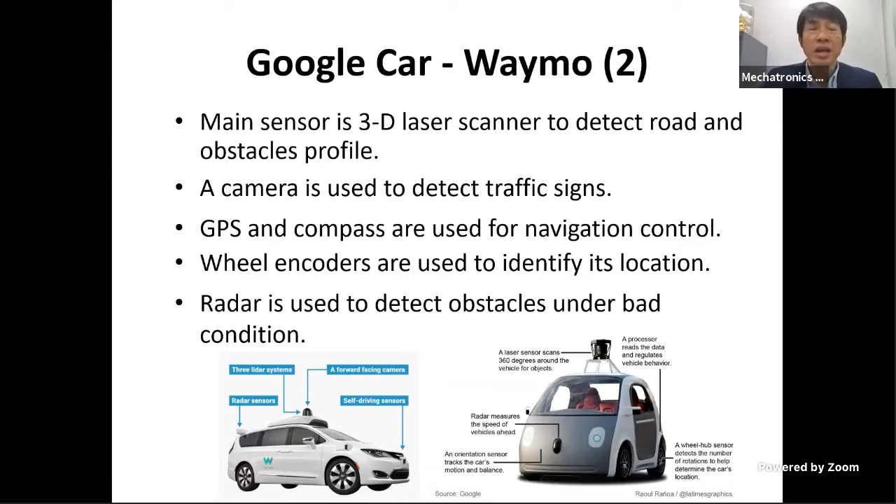The photo at the bottom shows several versions of the Google car and Waymo. Here is a video showing the Google car, the latest version, called Waymo. You can see it is uniquely designed. On top, you can see something rotating—that's the mirror from the laser lens scanner. It can detect distances of around 80 meters in real time, in 3D. The black part on the front panel consists of a camera and also radar. The self-driving car uses all this information to decide its path.

The second system is Autopilot from Tesla. Even though Tesla's Autopilot is not the highest technology, in terms of commercialization it is the most successful. The reason is that Tesla uses very cheap sensors. Tesla installed a lot of sensors, but all of them are very cheap: 12 sonar sensors, 8 cameras, and only 1 radar. To navigate, they use AI rule-based methods for navigation and obstacle avoidance.

There are some predefined rules, for example following the preceding vehicle, lane centering, rules used for the automatic parking system, or rules for when the vehicle has to handle a very sharp curvature. During those conditions, it will follow the predefined rule.

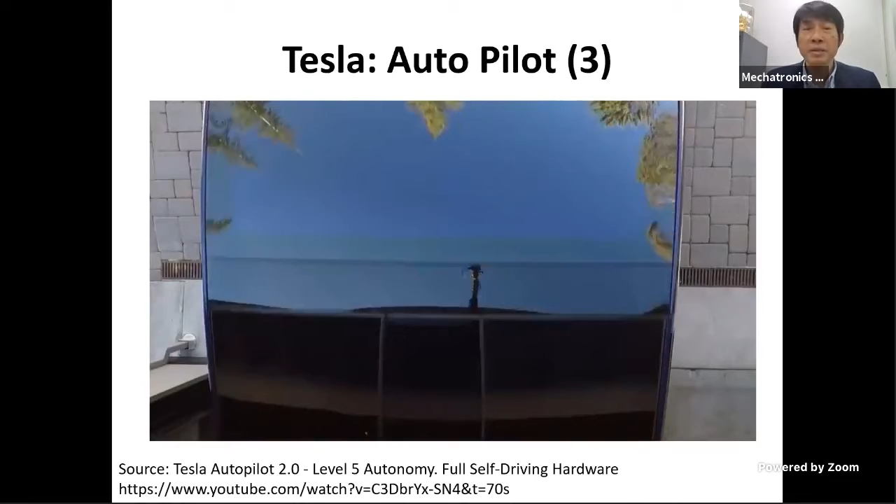Based on all this information, Tesla can do self-navigation. The autopilot system is installed in Model X and Model S, and it is an option for Model 3. This video shows how the autopilot from Tesla works. Actually, Tesla is a luxury electrical vehicle, so it looks just like a simple electrical vehicle.

The driver can select the destination, and then the autopilot from Tesla will perform 2 actions, as I already explained: global path planning and local path planning. And then it uses a lot of sensors.

In order to detect obstacles, it mainly applies cameras to detect the distance and direction of the obstacle. But Tesla still claims that it is the responsibility of the driver to be conscious, because this is just assistive technology. For any accident, Tesla informs that it is the driver's responsibility.

The third system that I will explain is called Open Pilot from Comma AI. Today we can see that the self-driving car is available as a module, just a module of the self-driving car or autopilot, and it is very cheap.

This is the Open Pilot from Comma AI, and it is open source. Drivers who know programming can modify the parameters and make the control fit their preference. The first version of Open Pilot is called the Eon Development Kit.

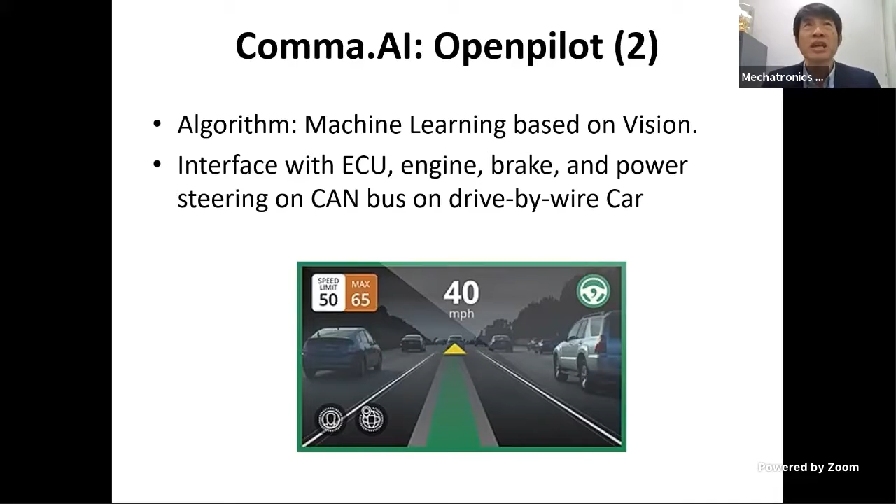Now let's come back to Thailand. Thailand started the project around the same time as the DARPA Grand Challenge, around 2004, 2005. At that time, I was the president of the Thai Robotics Society. We knew that every university in Thailand had different expertise.

AIT is very good in dynamic control. Chulalongkorn University is very good in mechanism design. King Mongkut North Bangkok is very good in manufacturing or machining. So there were 12 universities which joined hands, and we tried to create a national self-driving car project.

At that time, we proposed a 26 million baht project to the government to get support. But that was the year 2004, 2005, and all the researchers from the 12 universities were very young and didn't have much expertise. So finally, the government provided funding of just 1 million baht, only to do a feasibility study.

After we distributed it, each university received less than 100,000 baht, so we couldn't do much. Finally, we decided to approach private companies in order to support our project, and I will explain later.

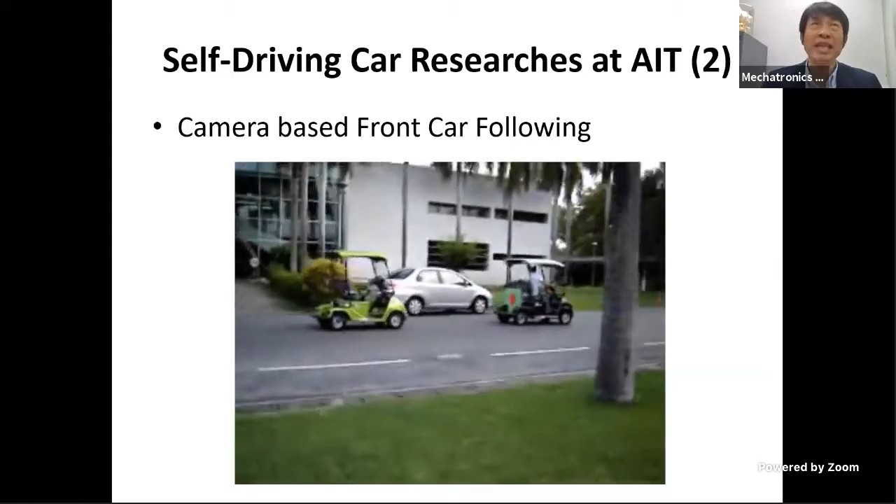We can also determine the position of the preceding vehicle by looking at the center of the lead circle in the image. Based on that position, we can control our steering wheel in order to follow the preceding vehicle. But this adaptive cruise control can get the speed of around 2 or 3 kilometers per hour.

There is one function which is very important for any self-driving car, that is the automatic parking system. If we are able to get the bird's eye view information from the parking lot, planning the path for automatic parking is very easy. But nowadays there are very few parking lots which provide bird's eye view information to the driver or to the car.

So what we can do is just install a local sensor. It can be sonar, radar, camera, or laser scanner. Based on the local information, we get only partial information of the parking lot. We have to accumulate the information, and after accumulation using sensor fusion, we have to decide how to do a proper automatic parking.

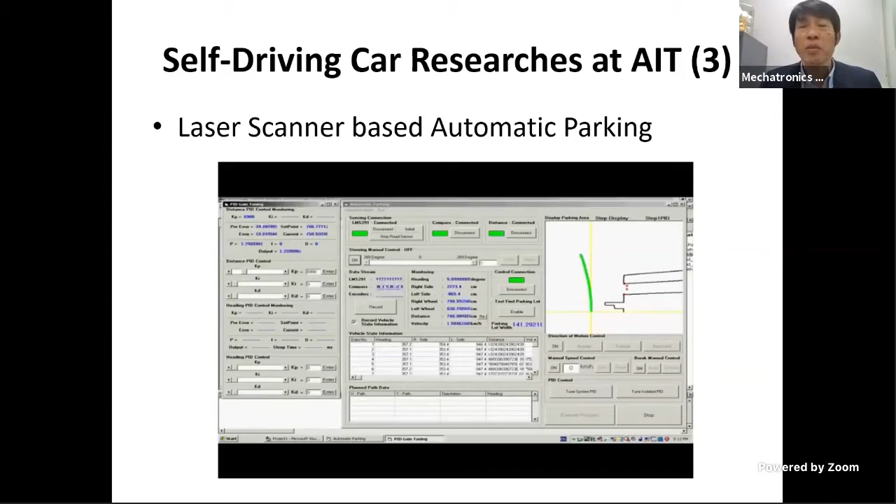This figure shows the GUI of the system. In AIT, we use a laser scanner to scan the parking lot. We get the profile of the parking lot, and based on the position of the vehicle, we can plan a path in order to do a proper automatic parking system.

In the adaptive cruise control system, if the preceding vehicle runs faster than our set speed, for example if we set our speed at 100 km per hour and the preceding vehicle runs faster, we can still keep our speed control at 100 km per hour. But if the preceding vehicle runs slower than our set speed, we cannot use speed control, otherwise we will crash into the preceding vehicle.

So what we need to do is use distance control. For the distance control, there are several algorithms. Some may prefer to keep a fixed distance, like 10 meters or 20 meters. That is one technique.

Another technique is by maintaining a time headway. For example, if we set a time headway of 1 second, it means that if the preceding vehicle runs at 36 km per hour, the safety distance should be 10 meters. But if the preceding vehicle runs at 72 km per hour, the safety distance should be 20 meters. If the preceding vehicle runs slower and slower, we may set a minimum safety distance, depending on the developer, whether 3 meters or 5 meters, so that we have enough distance with the preceding vehicle.

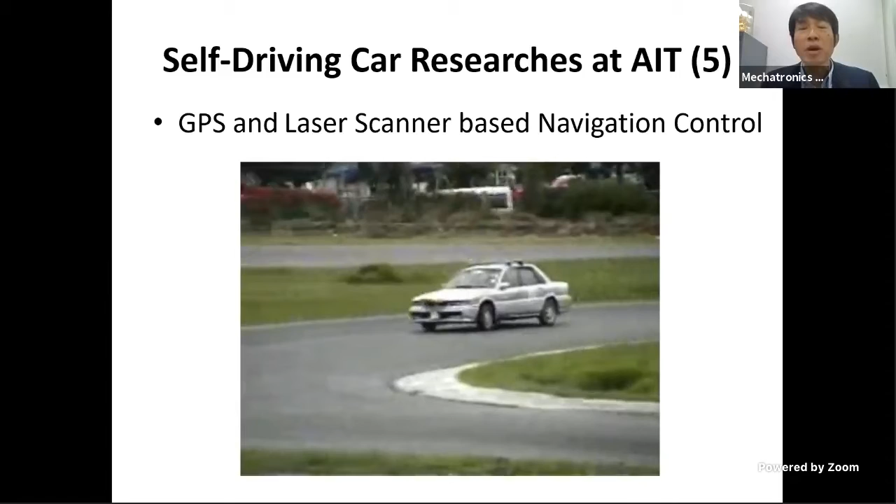If it obeys properly, then the bonus point will be given. And this is the video of the third year in 2009.

In 2009, we changed the theme to speed racing. This is the video from the final round between the team from AIT, with a Mitsubishi, and another team, the yellow car from Royal Thai Air Force Academy.

In the third year, the rule of the game is that we place one vehicle at the 0 kilometer point, and another vehicle at the middle of the 1 lap distance, because 1 lap at Bangkok Racing Circuit is 2.2 kilometers, so the other team is placed at 1.1 kilometers.

Then we provide 20 minutes, and the competitor has to run as fast as possible, but we limit to a maximum speed of 45 kilometers per hour, because otherwise it will be too dangerous and we will not be able to control it. So the maximum speed is 45 kilometers per hour.

Each team has to run as fast as possible in order to catch another team. If you are caught at a distance less than 10 meters, then you will be the loser. Then we find the next pair until the final round.

So this is the video from the final round. Here, the team from AIT gets the first prize. And actually, our speaker, Khun Methi, is also a team member here.

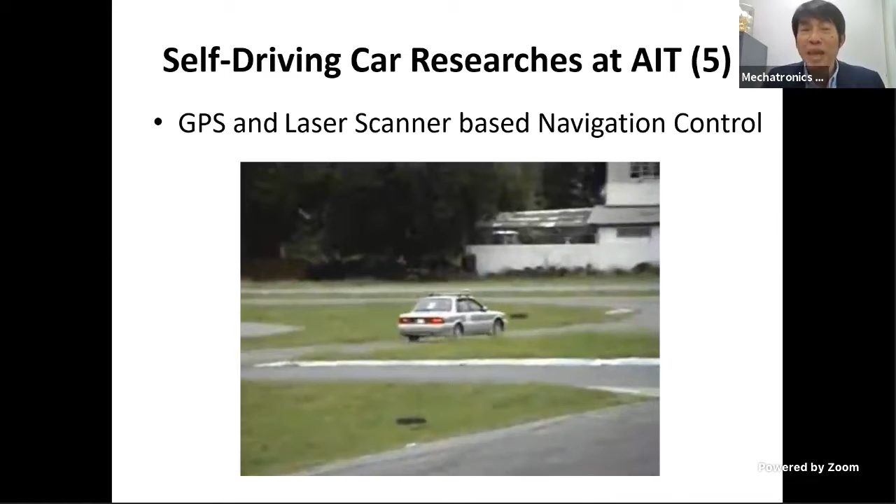So we install GPS, we install a compass, and based on the waypoint, it will try to follow the waypoint. We install a laser scanner in order to detect obstacles. You can see in the racing field there are several obstacles, and if the vehicle can avoid clashing with an obstacle, we provide a 100-meter bonus point.

Based on this competition, we could catch all the remaining teams in the competition, except in the final round we could not catch the team from Royal Thai Air Force, because they were also very fast. But after the 20 minutes, we calculate from the accumulated distance plus the bonus point, and finally the team from AIT gets the maximum distance and wins the first prize.

After we organized it for 3 years, AIT organized it on behalf of the Thai Robotics Society. We found that we could make the competition more challenging using the same rule.

It is a self-driving vehicle rule, but now we change the platform from 4-wheel, which is stable, to just 2-wheel, like a bicycle wheel. So it's not only trajectory tracking or obstacle avoidance, but now it involves balancing an unstable system, because the bicycle has only 2 supporting wheels, so it will fall since there is no driver. Now each team has to think about the control algorithm and mechanism in order to balance the bicycle.

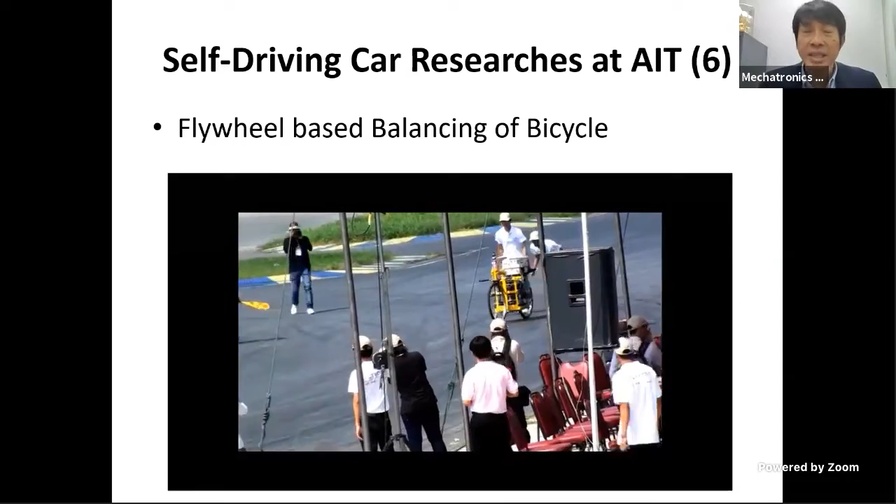In this video, we can see the champion team from AIT. We organized it, but we also participated in the competition. We use 2 flywheels. The 2 flywheels run at the same speed, but in opposite directions.

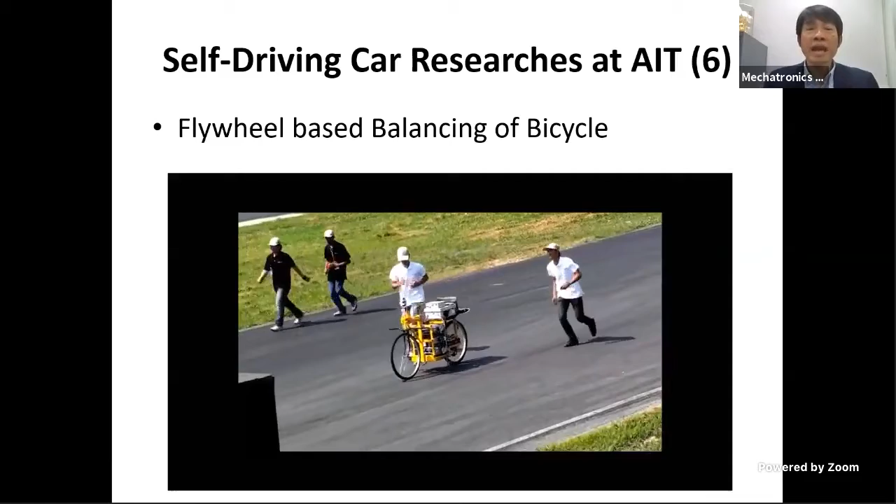Then we change the axis of the angular momentum of the flywheel. We design it so that they run at the same speed, meaning the summation of angular momentum on the vertical axis is always 0. So there will be no bias torque to move the bicycle to the left or right. But we have the summation of angular momentum, the rate of change of angular momentum along the front and back position, which will create torque to balance the bicycle.

If the summation of angular momentum is to the front direction, then the bicycle will have a torque which turns it to the left. But if it is to the back direction, then there will be torque to make the bicycle turn to the right.

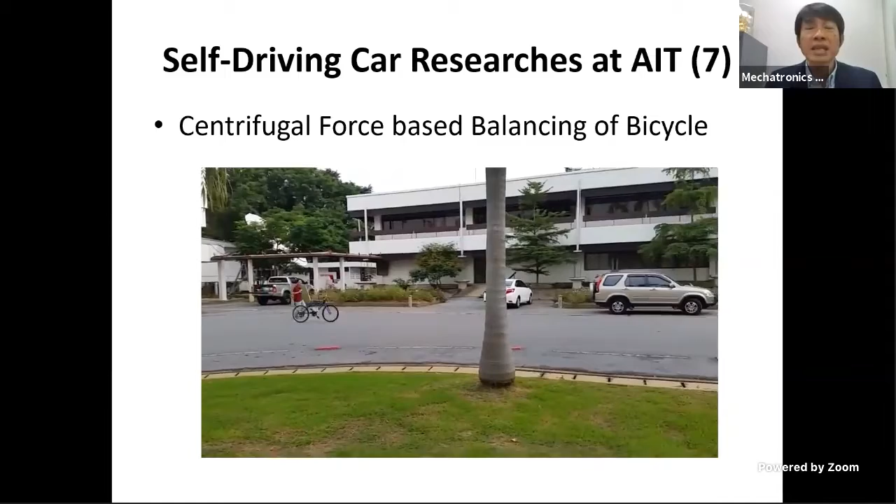This is another technique which applies the concept of centrifugal force in order to balance the bicycle. If the bicycle is falling to the left, then we can increase the centrifugal force by reducing the curvature radius and increasing the speed. Then the centrifugal force, which will be the same as the centripetal force from the friction of the tire, will create a moment that flips the bicycle to the right direction. So by controlling a proper speed and curvature radius, we'll be able to balance the bicycle.

This technique is very good, very interesting, but anyway, this team could not get the first prize. It is just the excellent technique award.

How about the indoor environment? If we have to work indoors and want to make a self-driving vehicle like a forklift, the problem comes from the sensor because we don't have GPS to provide X and Y coordinates. We have to think about other techniques to localize the system - we need to know the X and Y coordinate of the forklift and its heading. There are several techniques for localization: dead reckoning using encoders, using a camera with visual SLAM to identify X, Y and heading, or using a laser scanner with laser SLAM.

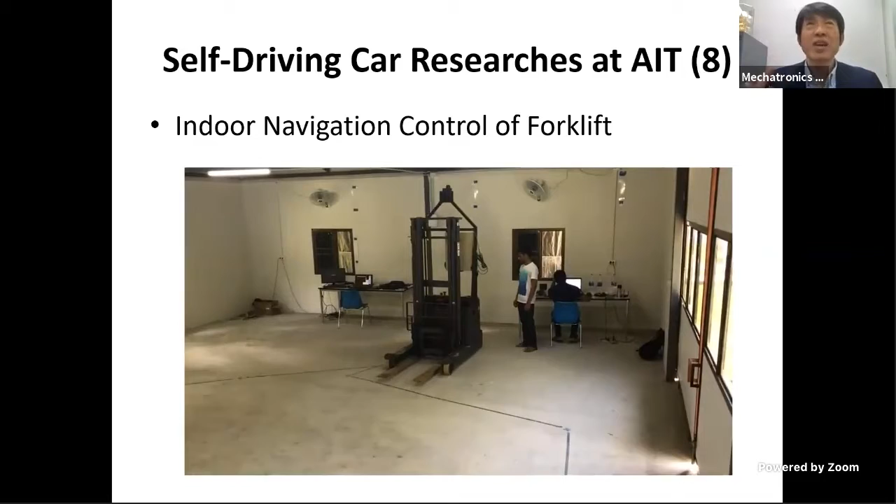This is the technique we use. We joined hands with Planet TNS and created this as a product, selling it for only 1.5 million baht. In the first phase, and in the second phase we make it as a module so it can be installed on any second-hand forklift to make it self-driving. For localization we use a combination of laser scanner and reflector - if we know the coordinate of the reflector in advance, we can identify our X, Y coordinate and heading. This is another experiment on obstacle avoidance.

For obstacle avoidance there are several algorithms. You can use the well-known rule-based approach, the behavior-based technique, or the potential field technique to avoid clashing with obstacles. We can also combine several techniques, like rule-based and potential field, to avoid obstacles. This is the experiment, but mostly nowadays in factories, self-driving forklifts just stop when they see an obstacle. We can enhance the function so it can avoid clashing with the obstacle, shortening the working time.

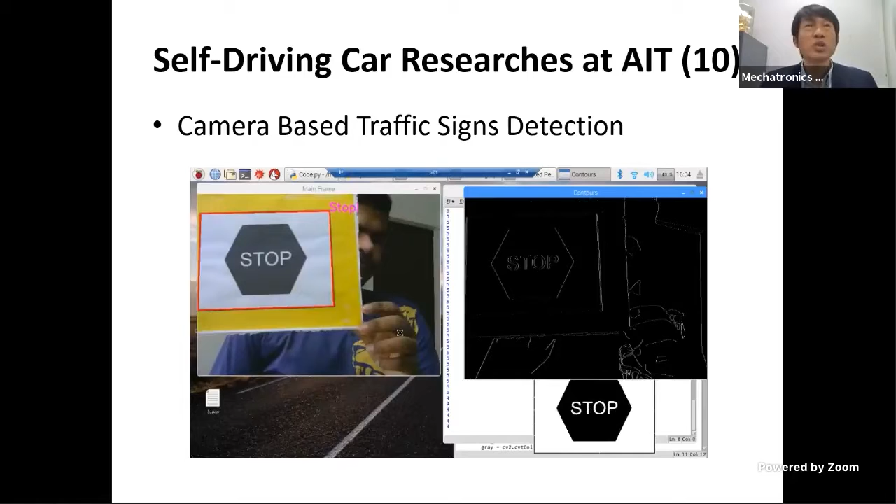This is also a very important technique: traffic sign or traffic light detection. When running a self-driving car, it has to obey traffic signs or traffic lights. We use a camera, and based on the image we process it - removing noise using Gaussian blur or other filtering techniques, then edge detection. Based on edge detection we identify either a circle or rectangle. Then we use perspective transformation so the traffic sign is at a proper angle - roll of 0 degrees, pitch of 0 degrees, and yaw of 0 degrees. Then we normalize it to get proper dimensions of the traffic sign or light, and do template matching using correlation, multi-layer perceptron, Hamming network, or competitive network to identify the traffic sign or light.

So these are some developments in Thailand. Now let me explain about the AIT self-driving car. We developed it on a platform of a Mitsubishi Galant 2000cc, model 1993, with automatic transmission. The cost of our platform is very cheap compared with the cost of the sensors - a laser scanner is 200,000 baht, GPS is 200,000 baht, but our second-hand Mitsubishi is just 50,000 baht. So it's super cheap compared to the other devices.

We modify the system and install the navigation module - we have GPS, compass, along with a digital map. For the LiDAR module, we use a laser scanner to detect distance to obstacles, used for obstacle avoidance. We install machine vision to recognize traffic signs or traffic lights. All the information is processed by the processor, and the output is speed control and steering control. The speed of the vehicle involves two things - since we use a gasoline engine, it involves the throttle valve, and if we need a high deceleration rate, we involve the brake system for speed control. For steering or heading control, we control the steering wheel angle.

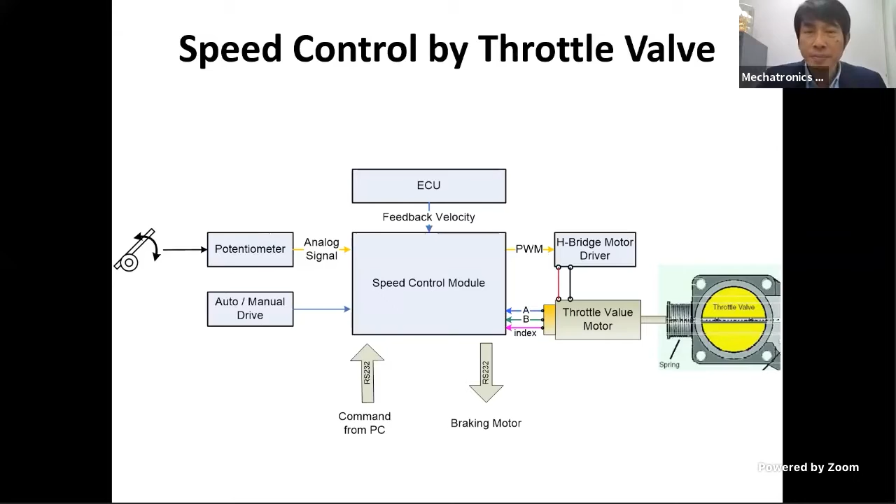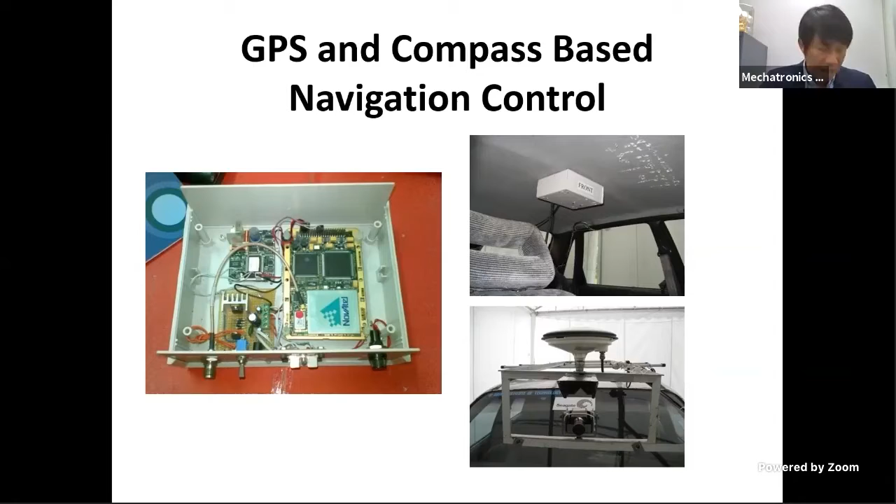Now, how do we do waypoint tracking? For any vehicle - car, bicycle, drone, or boat - if we want self-driving function, what we need to do is create a virtual straight line connecting between waypoints, and then identify the distance error, denoted by D. This is the distance of our vehicle from the straight line connecting two waypoints. We also determine the angle of the straight line connecting two waypoints, and measure our heading angle from the compass. Based on the difference, we call this parameter the heading error, denoted by A.

So the job of the control engineer is to design the control algorithm in order to make D and A parameters become zero at the same time. We may use state space, LQR, fuzzy, or a combination of two loops of PID. Actually, PD is quite enough.

One PD is used to control the distance - we have KP and KD for the distance. We have one PD for the heading angle - we have KP and KD for the heading angle.

It depends on what's important. If we think the distance error is more important, we provide more gain for the distance, then the vehicle will come very fast to the center, but the heading will oscillate. But if we think the heading error is more important, we provide more gain for the heading error, then the vehicle will run in parallel with the straight line and slowly and smoothly move to the center of the line connecting the waypoints.

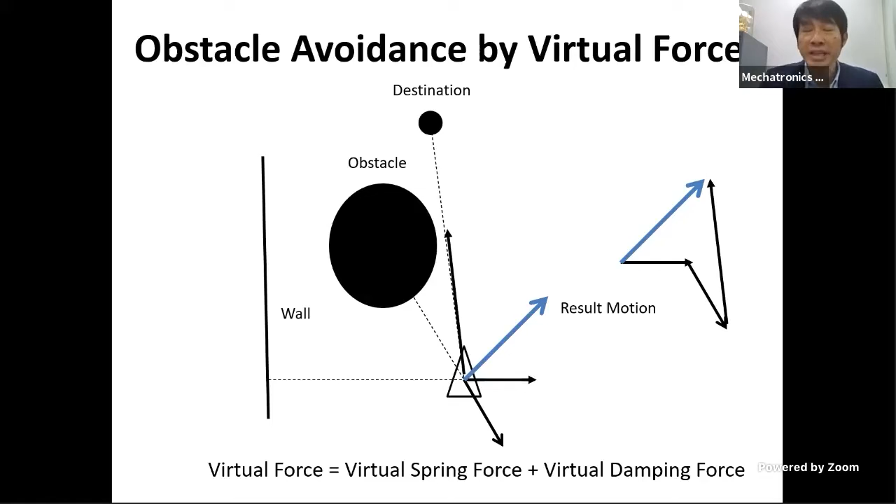For the trend of research and development in self-driving cars, in the past we used proper image processing in order to identify features and recognize the environment, and we had AI rule-based systems in order to design a proper action for each condition or situation.

But nowadays there is also the technique using the concept of completely machine learning. So instead of using image processing, we just use the raw data from the image and then use deep learning in order to identify the situation or condition. For control, we can also apply the concept of reinforcement learning in order to get the direction command and also the speed command directly by using the concept of training or learning.

Now I come to the conclusion of my talk. Self-driving car technology is very useful because it makes driving become safer and more efficient. I'm sure it will be utilized practically, and nowadays it is already used, even though mostly it is only partial, not fully autonomous.

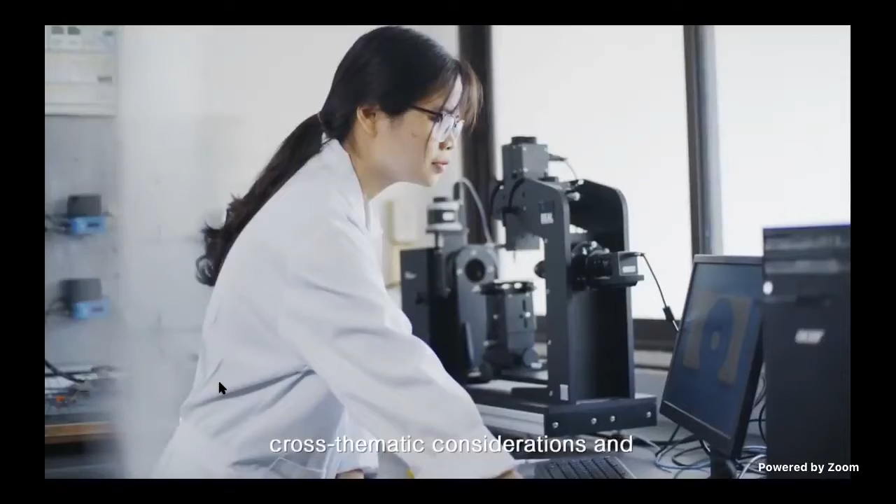A distinctive feature of our teaching and research programs is their close alignment with some of the major global challenges facing humanity. For example, climate change, energy, food, water security, technology, public policy mismatch, and human-machine fusion. Given the innate complexity of these challenges that defy straightforward explanations, our teaching and research programs emphasize multidisciplinarity, cross-thematic considerations, and pragmatic insights into the role of emerging technologies in broader socio-economic contexts.

We are working with many universities and governmental organizations in research collaboration and outreach activities. Some of our research findings have already been translated into new government regulations, new engineering standards and practice, and new engineering applications and tools. I believe our long-term effort has created significant social and economic impact for communities in the region.

We believe that our main role is to produce experts who are truly global citizens who can think globally and act locally. Our School of Environment, Resource and Development takes an interdisciplinary approach to study, analyze and solve global and regional sustainable development challenges, such as social and gender inequalities, rights and sustainability, urbanization and migration, food security, energy and environment, natural resources, and climate change.

The best management schools in the world are based on strong industry involvement, with leaders coming from around the world. It's also a place where a culture of innovation is encouraged. At our School of Management, that is the culture we're trying to encourage, with regular interaction with organizations and business schools where teaching staff and faculty come from around the world. No idea is discarded, and a multidisciplinary approach where collaboration with other schools is supported.

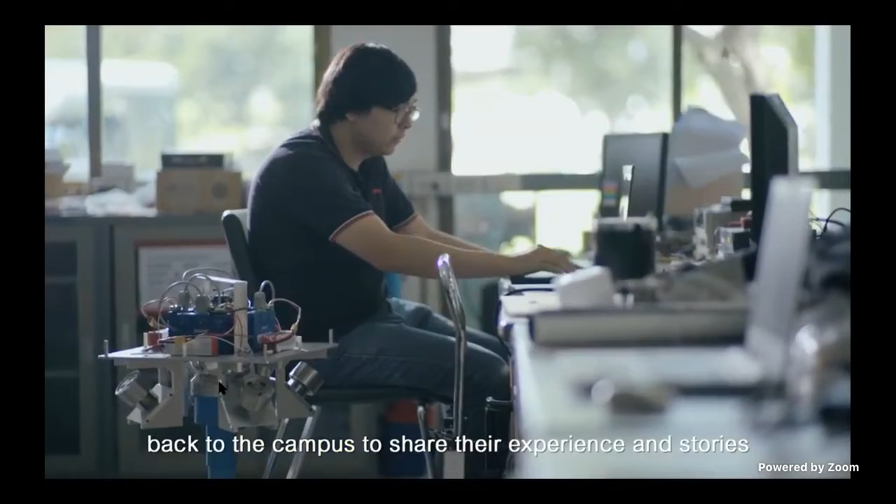The Entrepreneurship Center is supporting AIT students, faculty and alumni to transform their ideas into tangible outcomes such as prototypes, business plans and startup companies. We aim to bring our experienced AIT alumni and successful entrepreneurs back to campus to share their experience and stories and to work with our students and faculty to build their dreams here at AIT.

It's not only the knowledge and subject in the classroom, but the way of thinking. Because when we come to work, it's not exactly as it happened in the books. So having the AIT experience, we look at this like a way of life, and I can find many solutions to overcome obstacles and problems. Another important thing is initiative. This is very important for success in working life.

In my personal career, with the knowledge that I have gained from the Asian Institute of Technology, it has been very helpful in dealing with people, in managing my work life, in managing my family life, and also in furthering my knowledge through the research capacities that I have gained from the Asian Institute of Technology.

Graduates will be well prepared and have vast opportunities to pursue their passion for social impact by continuing in academia worldwide, or joining local or multinational companies, or working for socially focused NGOs, or becoming government officials, or starting their own businesses.

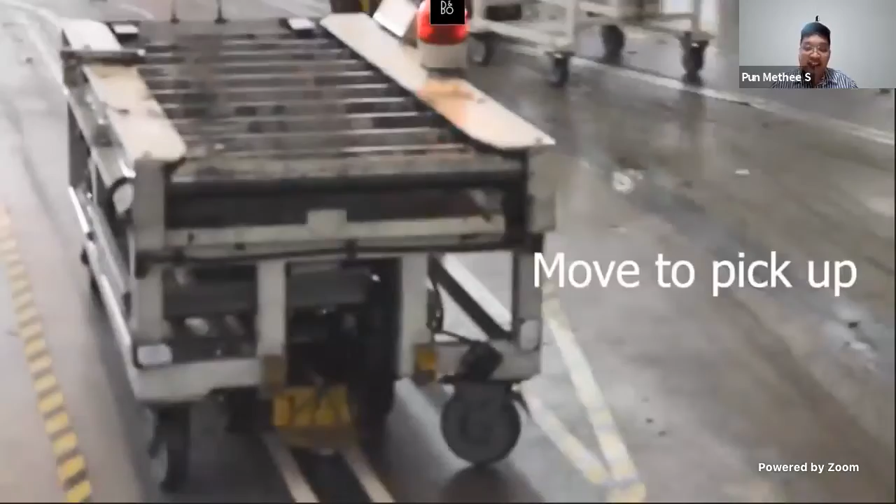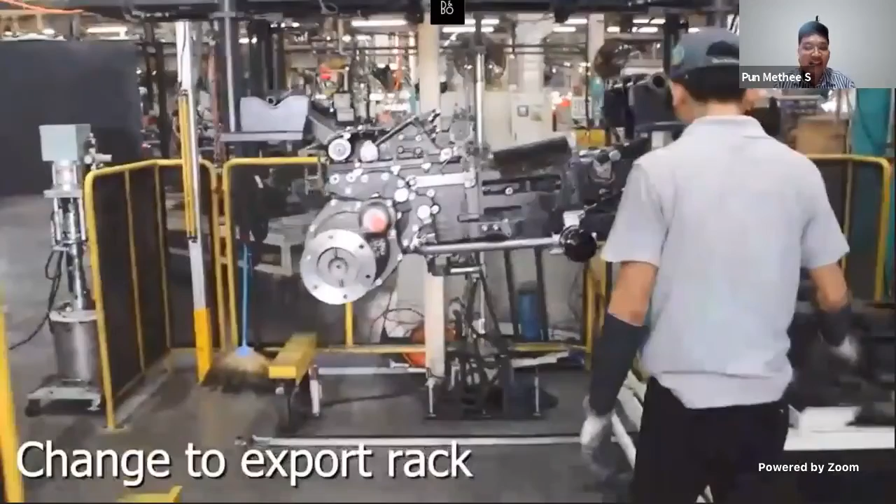But I implemented that technology in 6 months, and this is the result. We created an automated transferring process from one assembly line to another, which is totally 100% human-free. Everything was manufactured within the factory, assembled, manufactured and designed by our own staff, 100%. In the past, maybe we'd hire vendors or implementers to implement the technology and provide the solution for us. But in this case, we just bought the devices individually, and we designed every machine and mechanism ourselves. We designed this in just 6 months, with only 5 to 6 people to assemble and design everything. This is the first machine we designed, and we've used it for 8 years already.

And this machine has zero downtime. It's probably the first machine in the factory to have zero downtime.

So there's no breakdown at all, because during the design process, I educated my team about the safety factor, the module calculation, how to prevent accidents, how to prevent communication errors, about mechanical wiring, and the maintenance period design—lots of things we implemented in this project.

And it might not seem that difficult when you're in the academic view looking at this kind of automation. But when you work in a factory or in business, the key difference between academic research or a thesis and implementation in the factory is robustness.

Because as you can see, we have to manufacture and do this kind of work around 500 times a day, running 8 hours a day without any stop. So when you're doing research, maybe you just need one shot to record a video and present it in the thesis presentation, or just a couple of shots. But when you implement that technology, you need robustness in your machines and automation. So that was the key difference between academics and the implementation of technology.

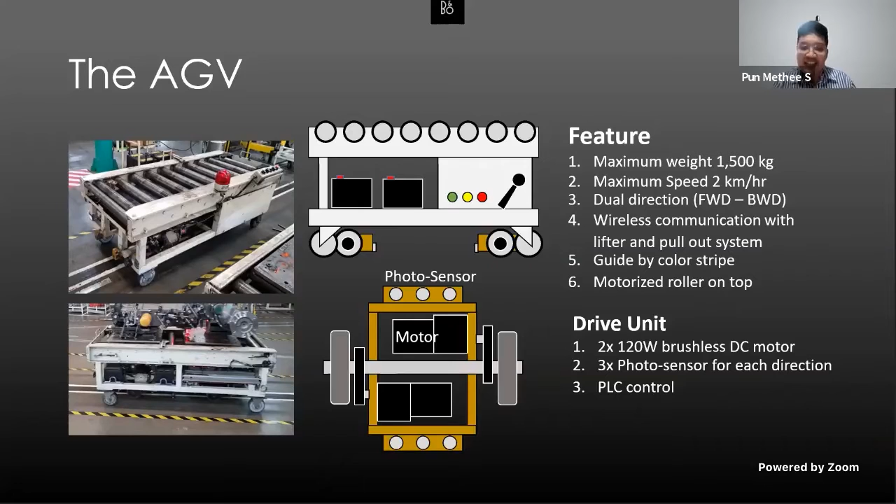So no breakdown at all with these machines. If you have deep knowledge in those technologies, you can implement it much cheaper, because you invest a lot of time studying and practicing the technology beforehand. So it's much cheaper.

Based on this kind of technology and the skills we have, we expanded more, not just this one project. We invested only 1 million baht, saving investment costs of around 6 million baht and reducing the running cost a lot.

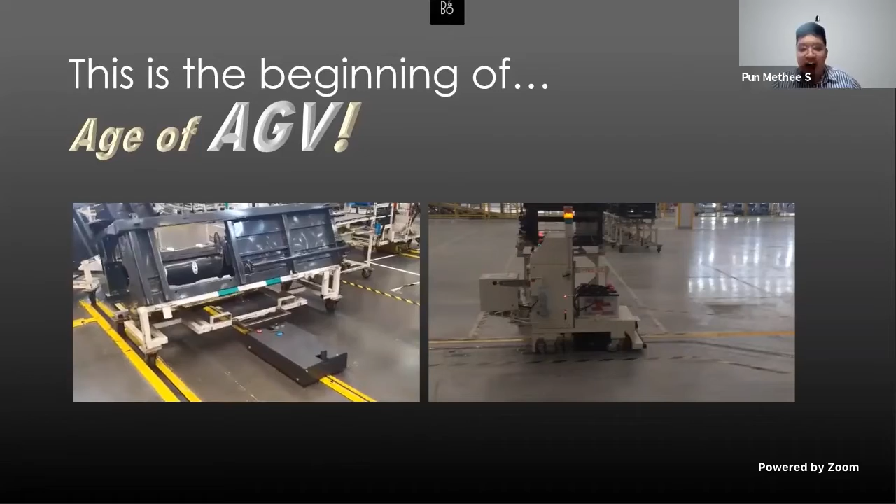We also started a new age of AGV. When we launched that project and announced it throughout the factory, other production lines were very excited about implementing AGVs because they were manufactured by ourselves at very cheap cost. So we expanded and shared that technology with other production teams and lines so they could make AGVs themselves.

Just 1 to 2 years after the first launch of those AGV projects, we had around 200 AGVs throughout our factory, because we expanded the technology, knowledge, and know-how about how to manufacture and design the AGV to all production members, so they could build and manufacture them themselves at very cheap cost, helping efficiency and reducing manpower costs a lot during that time.

And we didn't stop with just the AGV. We also made robots ourselves. This is the automatic bonding machine. In the past, we had to use humans to do the bonding between manufactured parts.

So we implemented knowledge about robotics and automation to manufacture this robot ourselves, which can be programmed to do the bonding. Maybe you can see that lots of manufacturers already sell robotic arms that can do the bonding process, but we decided to develop it ourselves because we wanted to plant that knowledge into our staff, since this kind of technology can expand and synergize with other knowledge.

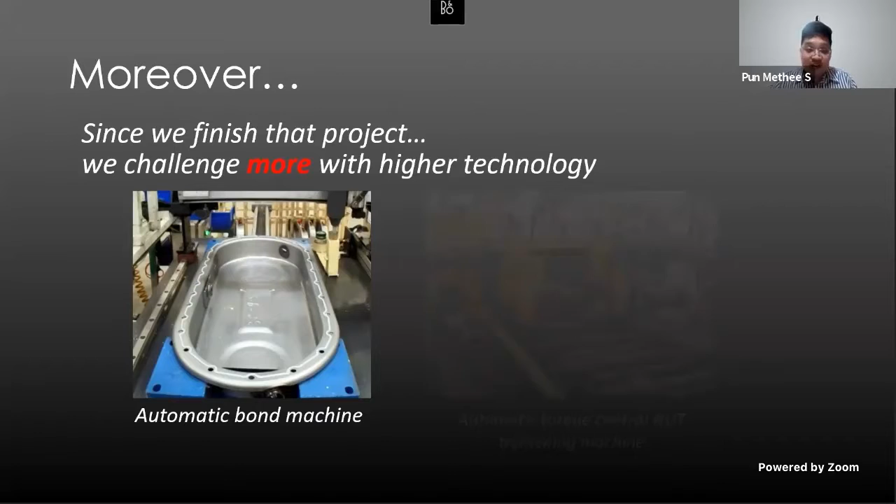For example, not only bonding, but we can also do torque control or even the tightening process. Maybe the machine is bulky, but because we made it ourselves 100%, the downtime is very small, and the fixing and maintenance costs are very small as well.

And with this technology, if we invest more and study more, we could even turn it into a new business, making machines for other factories or other businesses as well.

As you can see, we've expanded a lot with the AGV and made it bigger and bigger. The biggest one can lift 1 ton capacity with just a single AGV, and the cost is only around 100,000 baht. We can lift 1 ton units.

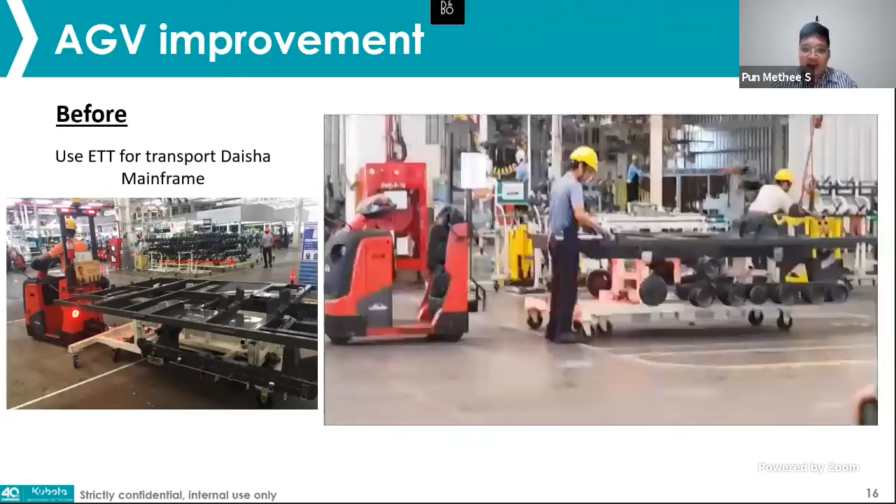For example, this video shows that in the past we had to use an electric towing car and one human to pass the frame of the combine harvesters to other production lines. But then we changed it to use the AGV instead.

This one implements a zero-turn mechanism at the cheapest cost, and is also fully autonomous without any human intervention. It can work 24/7 without any downtime. Because we invested in this technology and kept our team researching, studying, and trialing, the cost is very small, and we can expand to more advanced technology.

And the next one, I developed this solution 3 years ago, in 2018, about machine learning.

We have issues a lot about the labeling and the sticker posting on the machines. Maybe the operators or the staff are very weak or very tired, so maybe they are missing the models of the labeling on the stickers. If we use industrial technology like automatic picking and placing, we have to invest a lot, but we can use an inspection system which is very cheap.

We can use just a web camera, which is around 2,000 baht in total, with only one PC, and write our own machine learning program to detect the label and cross-check with the database of the manufacturing to see if this product has a correct label or not. We can show the operator that the label sticker was correct. It's a very cheap solution and very efficient.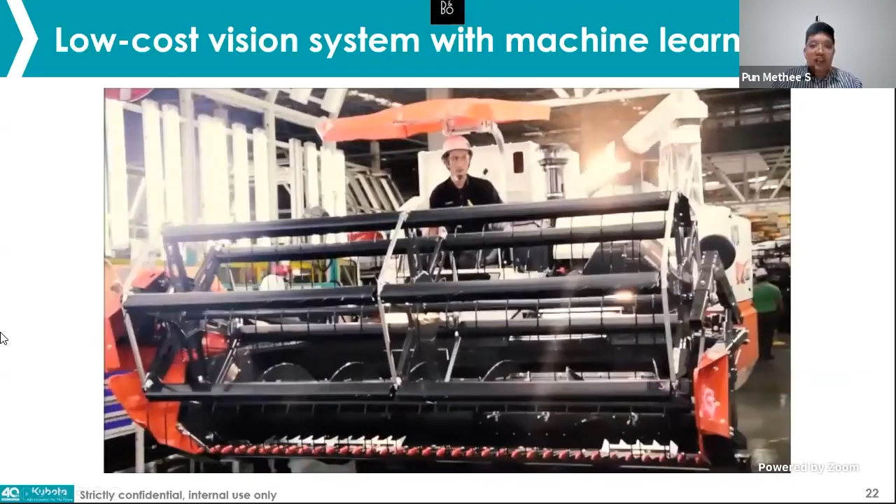This is a video of the solution.

If you ask about the current vendors of vision sensors, as I see right now on the market, very few vendors have already implemented machine learning in their solution. They just use image processing, which requires very high computational power to compute the image, with a lot of advanced image processing techniques to identify the label.

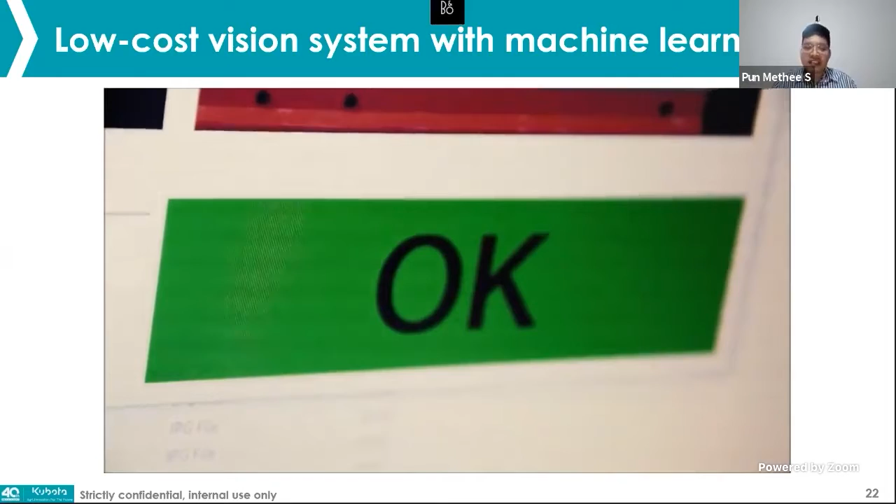But based on machine learning and already published packages on the internet, you can make it free of charge, with just a little coding knowledge and only one web camera. You can implement this solution anywhere in your factory.

So it's very cheap, and it encourages others to see that the newest technology in the world doesn't have to be expensive. It can be cheap, and it's not a secret anymore because the community of developers embraces the open source trend, and we have GitHub, we have Medium, where everyone would like to share their solution.

Share the programming. So the knowledge is not hard to obtain anymore. If we keep the culture of researching and studying, we can get any knowledge to implement in our factory or our company at all times. And that aspect was about the factory part.

And the last one is about the business part. As you can see, Kubota is also in the agricultural sector, and we're looking into the future that we are moving forward to precision farming or precision agriculture. We not only focus on machinery anymore, we also focus on data, we focus on IoT, and synergize and integrate all the data to make agriculture more precise and more productive.

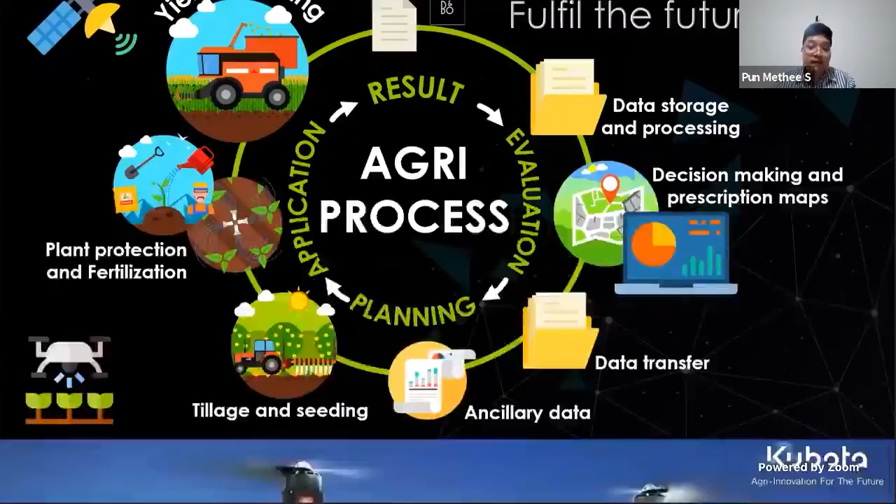So in the future, we foresee that right now we are in the process of mechanization and also transforming to smart agriculture, which is about data and precision agriculture, not only about the machinery, but also about the data to assist farmers to understand more about the field and also the practices they need to get rid of the issues on their farms.

So maybe in the past you perceived that Kubota mostly focused on machineries. We still focus on machineries anyway, we sell tractors, combine harvesters, excavators, diesel engines, power tillers, and transplanters. But right now we expand our vision more to be an end-to-end solution. We focus around our farmers to have a better life.

So the machinery was just one section that helped them get better yields and better profit, but that's not the only factor. If they understand more, and if we can help them throughout the supply chain around our farmers, we can improve their life and we can improve their profits.

So what kind of technology do we need? In the past, we just implemented the machinery solution, but we have to integrate with the agriculture solution. In Kubota, we have to invest more and study more about agriculture, not only the machinery.

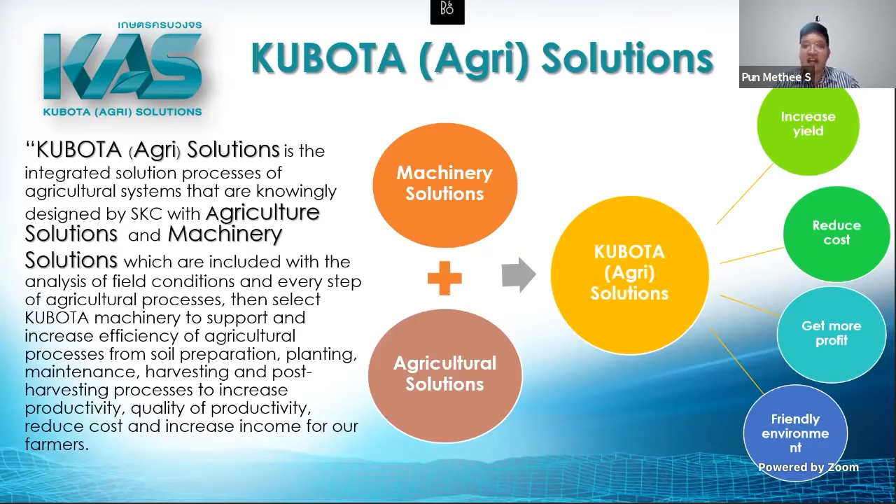In the past 2 or 3 years, Kubota has evolved a lot to expand our services and machineries to cover all of the processes within the field. In the future, we will expand more on getting data to our farmers.

Last year we already started selling drones, and we have supplied farmers in Thailand with a crop calendar application and chlorophyll analysis. We also co-researched with AIT to develop a CCTV camera that can analyze and justify the chlorophyll values of the rice field, to get data to the farmer to understand the health of their rice automatically.

We also developed weather solutions and farm management solutions. This year we started selling greenhouse solutions to our farmers, and expanded to vegetable solutions and fruit selection solutions.

So we expand our portfolio and our solutions to be more precise and get our farmers in Thailand to be more like precision farmers, not just doing things the traditional way, but doing it the smart way by using data to assist them to make their farm more productive.

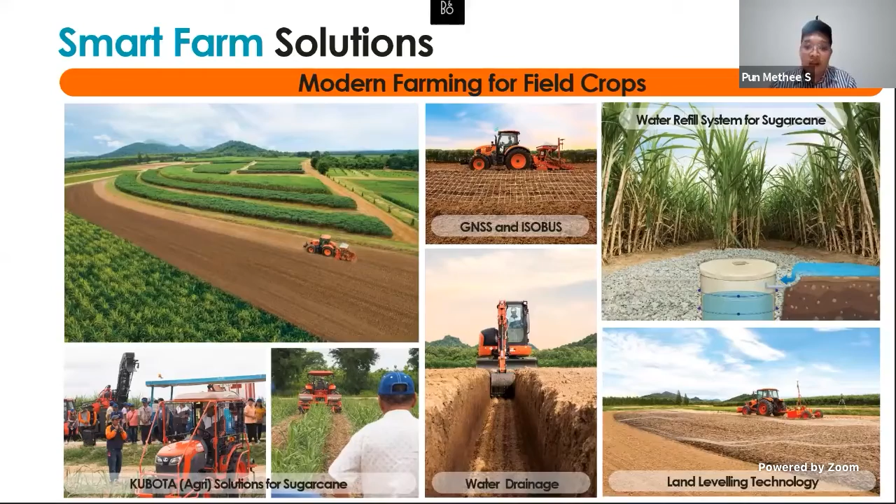So this is some of the technology that we use and test within our farm. We have a Kubota farm in Chonburi province where we test this technology ourselves - not only the machine technology, but also the field design technologies.

As you can see on the left side, the rice field has curvatures. We designed those curvatures to match the slope of the field, to keep the fertilized top layer of soil exactly the same, and designed all the width and distance to be applicable with any machinery solution.

So our current new goal and vision is to increase the efficiency of our farmers and standardize the farm work to be more precise, using data to reduce the cost of the farmers and increase their profits.

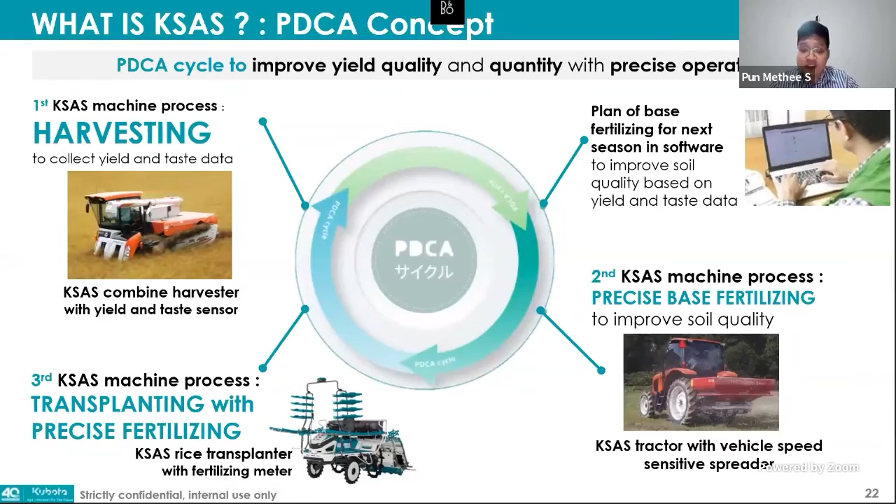Okay, maybe I have to skip some of the solutions. Right now in Kubota Japan, we also launched the KSAS solution, which is an integrated platform from the machines and the data, to provide farmers with more understanding about yield and information on their farm.

And actually we already sell autonomous tractors, autonomous combine harvesters, autonomous transplanters, and drones in Japan. But those technologies are still based on RTK solutions, which are very expensive in terms of the device and also the RTK antenna network.

So as you can see, even the commercialized products right now use technology which has a very high cost. So we need to implement a lot of research, and join forces with academic teams to find cheaper solutions to implement with farmers, or even into our machineries, to make it more commercialized and accessible to our farmers in other countries.

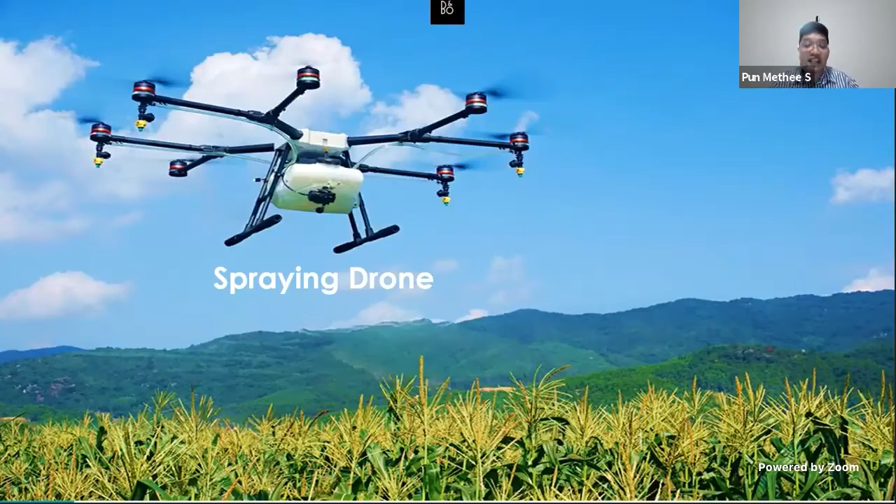This is the solution that we implement in Thailand. We call it the Kubota Intelligent Solution, which is a telematic solution. We install GPS devices and mobile connectivity devices on our machines - the tractors, combine harvesters, and mini excavators. We gather that information and publish it to our farmers so they can see their results, their working performance, and the driving path of their machineries in real time.

We also developed the crop calendar, which is an assistant application that keeps track of their rice field and farming behaviors. They can record data, and we can also suggest suitable periods for doing agriculture tasks through the application automatically, so the farmer will be more efficient and productive.

We are now in the process of researching a farm management system that integrates all the IoT sensors into a single platform and then provides it to the farmer. But this is still just a research project we are working on within our testing fields.

And also the scouting drone solution, to analyze the field and get information to the farmers about the health of their field based on their crop types.

And also the machinery matching platform, which is like Grab and Uber, matching machinery drivers and farmers together to help them access more advanced machinery, and even provide rental solutions or rental offers to our farmers.

And this is all for me, and for Kubota - what we are working on right now, trying to implement the newest technology or research into the industry and give it to our farmers.

And last but not least, in conclusion of my experience 12 years after I graduated, I have also tried to push the company forward into the digital era and into the newest technology innovation.

The first thing I want to give everyone is that even though you have already graduated and got a degree, you still have to keep practicing and studying new skills. Practice in the academic view is like continuing to research, trial and fail, try again, and keep comparing the newest technology or trends to understand what's suitable for your industry and situation. Keep researching and testing new ways of business, not just by yourself, but within the business itself, so everyone sees the new opportunity by utilizing new technology.

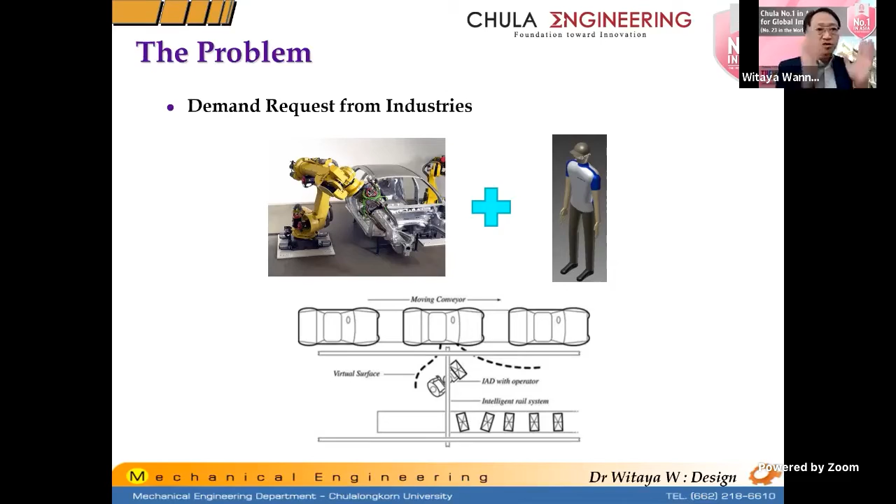I would like to give you some example. On my right hand here, if you have a Cartesian robot - a very simple Cartesian robot - imagine a human operator has to carry a weight, a very big weight, like their own weight, about 100 kilograms, and has to manipulate it at a speed of about 2 meters per second, in a circular motion like this. If we use existing technology like a gantry or Cartesian robot to do so, we need at least about 2 kilowatts of motor power in the system, in order to control an object that has 100 kilograms to move around a circle of 30 centimeters at 2 meters per second. That's a lot of power.

Think about if you or myself have to grab this object and work with a robot that has 2 kilowatts of power on it - that's potentially dangerous to you, right? Because it's too massive. And most robots are actually not back-drivable. They have a lot of gears, transmission, that is basically not back-drivable and really heavy. So it's potentially dangerous when we interact with those kinds of high-power robots. How could we do it safely then? We also need a robot - we need to design something that's able to work with humans.

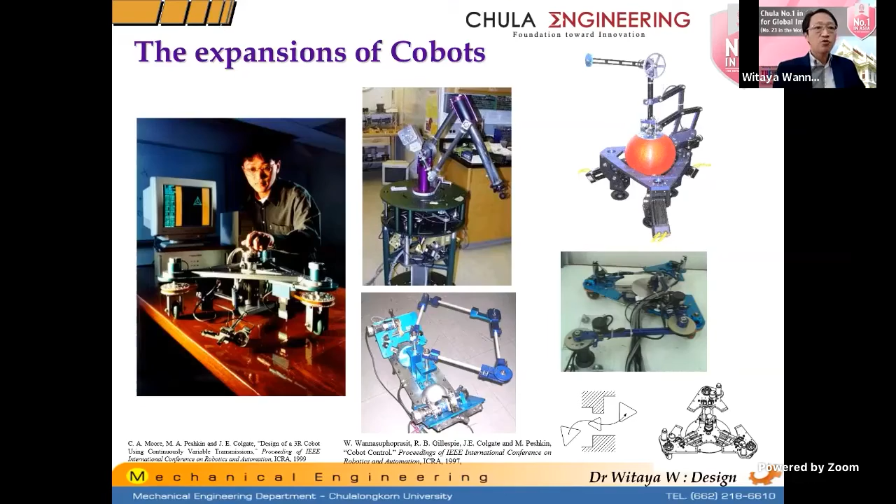We did a lot of things in the laboratories, and produced a lot of papers about this — mostly from Chulalongkorn University, Northwestern University, some from National University of Singapore, and some from University of Florida. We have a lot of peers in cobots who developed a lot of cobots in that moment, and I myself am really proud of that.

If you are old people, you must know this magazine, okay, we call it Popular Mechanics magazine. I also feature on that magazine as well. Okay, this is myself.

This is my second prototype of cobot. And we got an award as well. Actually, we got nominated for the Discover Award in the United States. We were finalists, we didn't win the award, but we were finalists. We think it's quite promising. We developed a lot of prototypes that were really promising from laboratories, and it's time to expand our ideas, and we got a lot of support.

This is the first industrial cobot that we developed for General Motors. What it does is, it's a robot platform, a scooter robot, attached with a robotic device, manipulators. What they do is they basically guide the human operator to the vehicle and remove the door. It's the first process.

When you assemble the doors, usually they have to paint the door, the whole body. They have to sink all the doors, all the bodies, all the car into the paint, and once the paint comes out, the first process is they have to remove the door in order to put a part inside. Removing the door is really hard to do because you have two hinges, and you have to be very precise to lift the thing off, about 1 millimeter precision or less, in order to take this thing off.

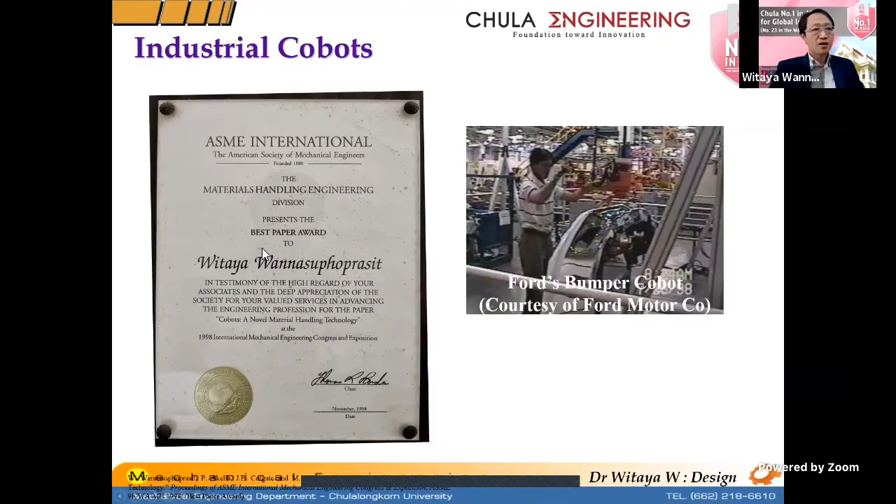Let me show you the videos of what the industrial cobot looks like.

Maybe here, let me stop chatting first. Let me share my video. Where is it? Oh, here we go. Can you guys see the video? Yes, sir.

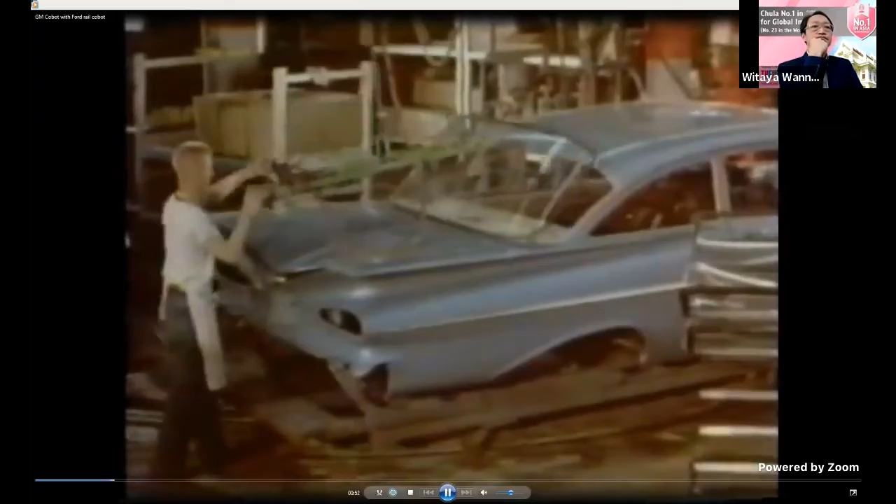It is a timeless image that reflects an age-old fascination, the abilities and capabilities of the human mind and body. Long before this image was created, and now more than ever, the study has continued. The body, how does it do what it can do? By extension, what tools can be designed to assist in work and improve performance? There is certainly no greater example of the application of the results of this research than the manufacturing process. Newer images, these less than 60 years old, illustrate current progress by their own amazingly dated appearance. Automation progresses, physical assistance is limited, and humans, with cognitive ability unequaled and sensory perception unmatched, remain the critical components.

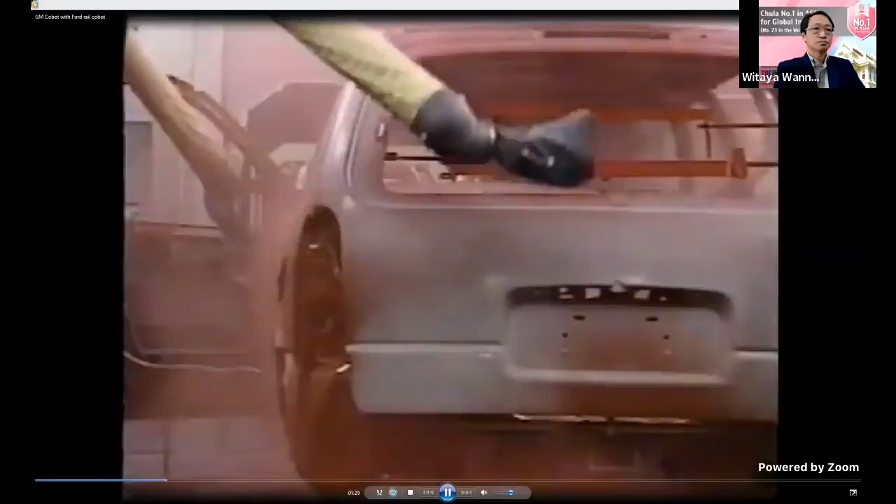Today, familiar images of the advanced levels of automation and robotics reflect the current state of automotive manufacturing. The body shop, a seemingly choreographed showcase of production technology, unprecedented levels of automation, speed, efficiency. The paint shop, formerly a less safe domain of man, is now a cleaner, safer, more efficient environment offering consistent quality and predictable performance. The body shop and paint shop have been changed forever with the implementation of massive robots and exploitation of robotic attributes, strength, consistency, and tireless efficiency beyond any human ability.

But what about general assembly, where subsystems come together in the final stage of automotive production? Humans have played and will continue to play the most important role in this, the most intricate part of the manufacturing process. Here, workers need to rely on experience and sight and touch. Decisions and adjustments are made quickly and constantly. The right part for the right model, the speed of the line, placement of the part. The ability of a worker to sense, process, and adapt is obvious and impressive.

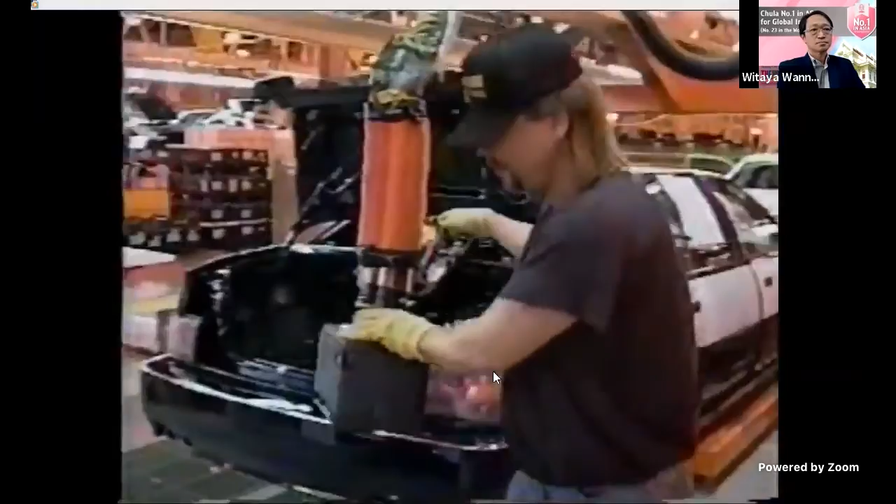This worker, Don Bowman, is actually nearly blind, but can rely on other heightened senses and experience, and has adapted to meet the requirements of the task. All of this underscores the need for a tool that not only lightens the worker's physical requirements of lifting or holding, but also provides task-dependent guidance. That is, it underscores the need for intelligent assists. General assembly requires human involvement, yet these humans have physical limitations. According to the U.S. Department of Labor, overexertion while maneuvering objects led all other disabling events or exposures.

This ergonomic liability is cited in up to one-third of all cases in manufacturing environments. So the challenge is to assist the indispensable worker, helping to limit the lifting, bending, and contorting while also avoiding the safety hazards of massive, powerful robots.

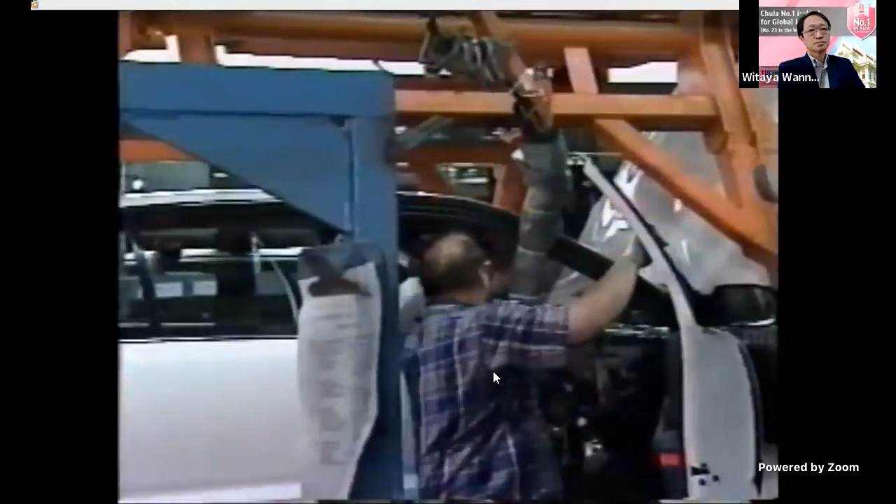The assist for these general assembly tasks must satisfy ergonomic requirements while maintaining a level of performance equal to or greater than that already in place. The assist tools must improve the worker's ability to prepare, position, and place parts and assemblies while providing consistent, reliable, yet simple and safe assistance with repetitive tasks.

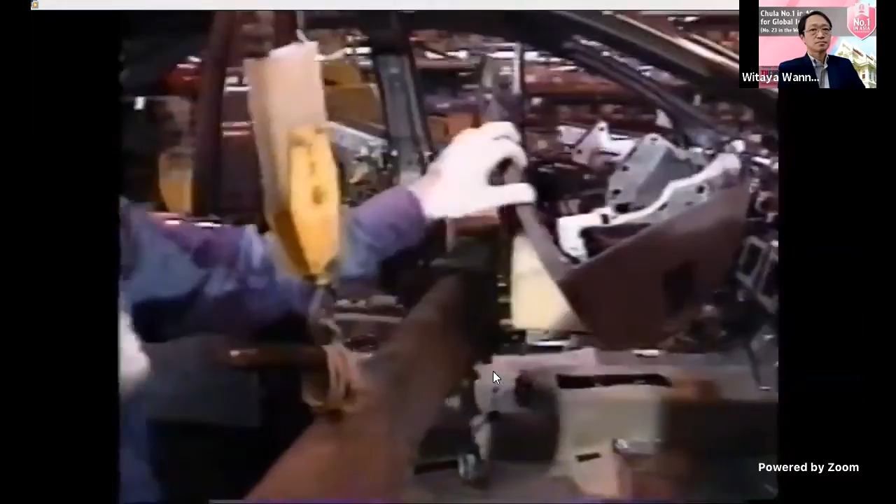A worker in this situation must bring in a cockpit subassembly through a limited opening, the door. The assembly must then be oriented, fit, and fastened. A human will encounter ergonomic difficulties with the task, and a robot alone could not accomplish the fine adjustments necessary.

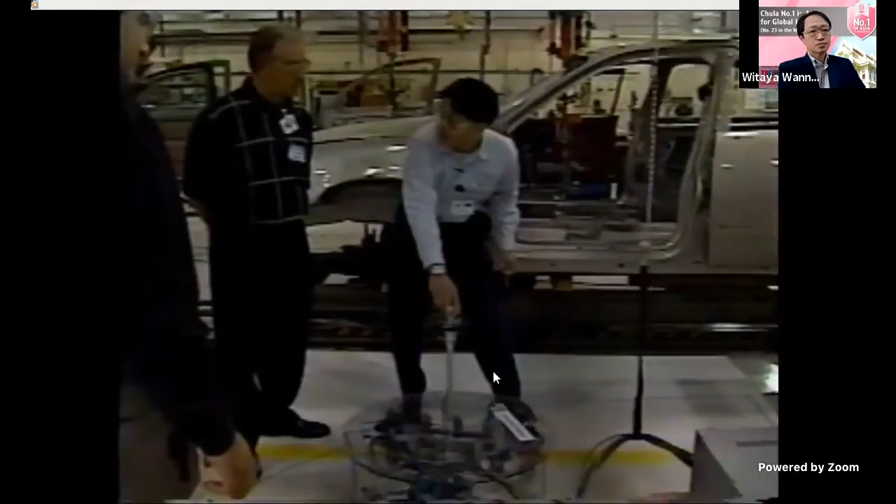The General Motors Robotics and General Assembly Center at Northwestern University combines intelligent robotic assistance with human force and perceptory senses. This is Scooter, a prototype cobot developed by Northwestern University graduate student and General Motors intern Witaya Wannasuphoprasit. The worker provides the force to move the cobot and its load, essentially coupled to the passive device through his efforts to move the load.

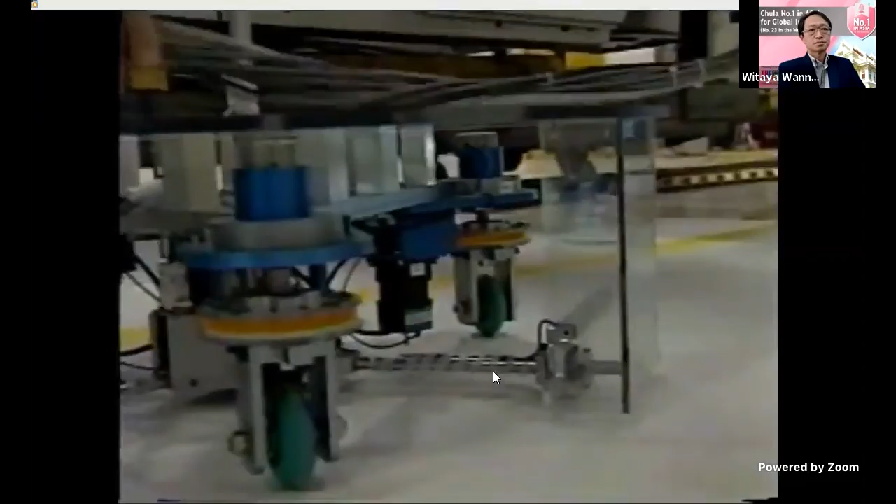The cobot offers assistance in moving the load, but more importantly, through a software-driven process, it helps the worker guide the load to its final resting spot. Invisible or virtual walls are programmed in, and the cobot allows movement only within and along those walls. The wheels simply pivot and redirect worker energy along the invisible virtual walls. There are no brakes on this unit.

The programming still allows for the worker to see or feel adjustments needed and provide the force necessary to modify the path of the load.

Building on the promise of Scooter, the GM Northwestern team designed and built the world's first industrial cobot, a full-scale prototype cobot-based door unloader for the Pontiac Grand Am.

The doors-off process, the first task. You just saw that it actually takes only one second for this human operator to remove the door off. So fast, and really easy. So without effort, they push the cobot through the door, and once they engage it, they can lift it up immediately. It's so quick.

In the GA build process, the removal of the painted door from the painted body shell is required in order to simplify the remaining GA assembly tasks.

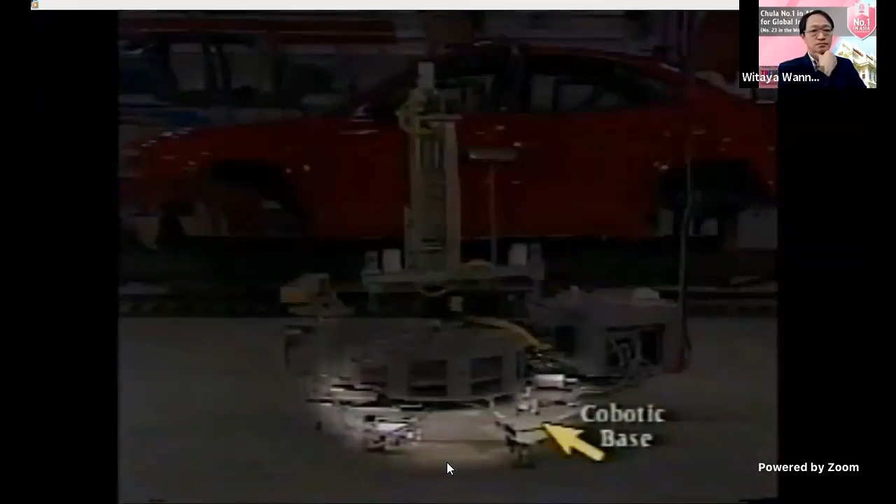The doors-off tool has two primary components: a scooter-like computer-assisted cobotic base and a non-traditional door removal tool. The cobotic base consists of an integrating platform, a steering handle, three-wheel units, a computer, and some sensing to precisely locate the platform with respect to the vehicle body.

Note that the wheels rotate in response to the handle motion in the caster mode. The door removal tool consists of the lift unit. The door unloader, like Scooter, demonstrates all the basic cobotic control modes.

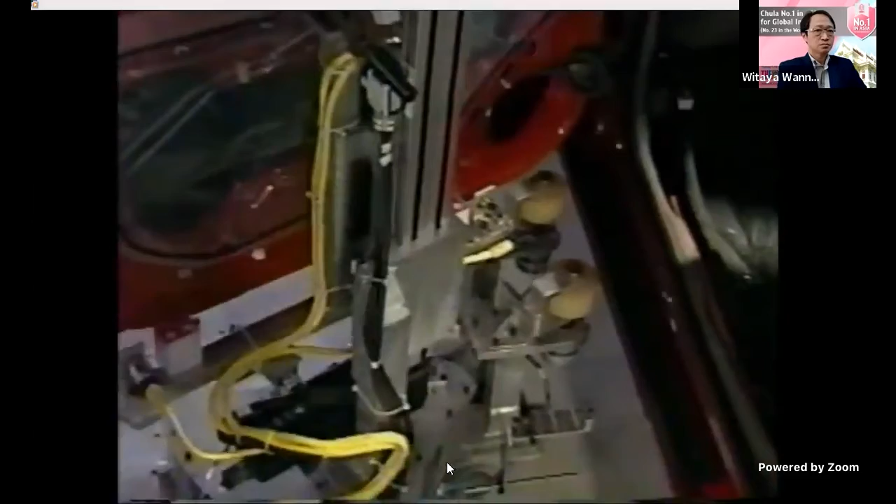For example, the door unloader can enforce a circular trajectory on the operator. The doors-off process essentially requires the operator to position him or herself with respect to the vehicle on the moving line. The precise location sensing and control methods enabled by cobots ensure that the operator is positioned in all three degrees of freedom: X, Y, and theta.

Once positioned, he or she activates the two-stage lift mechanism, which lifts the door in an imprecise mode, followed by a very precise mode. At the instant the door is taken off the vehicle, the cobot executes an escape trajectory that, for quality purposes, clears the door and the unloader from the vicinity of any Class A surfaces on the vehicle. This is important because of the very tight tolerance.

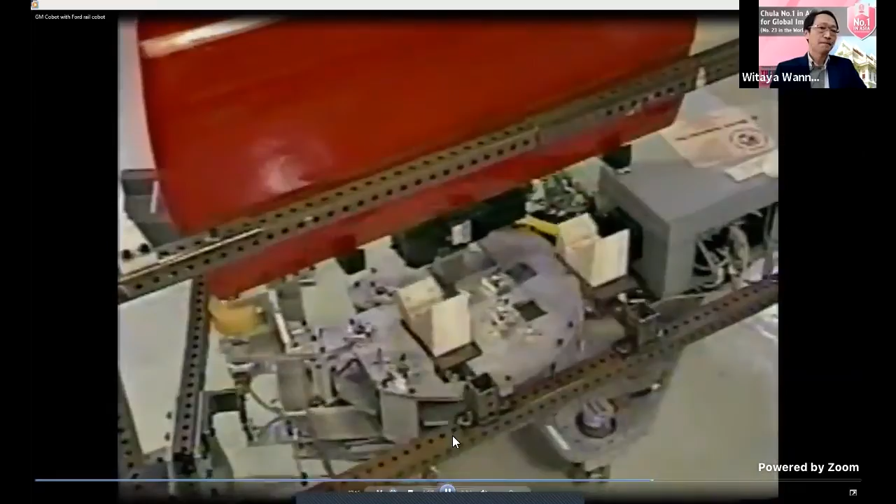If any mistake occurs, the paint will get caught, causing some damage to the car. The operator then drives the unit toward the drop-off station, where the door is carried away to the door trim area for installation of equipment like the glass and window regulator.

The door unloader and its predecessors highlight the original goals of the project: to provide the assembly line worker with state-of-the-art assist tools, the ability to mitigate ergonomic problems by providing large, easy-to-hit gross targets, and the potential to impact productivity. These cobotic devices are intrinsically safe.

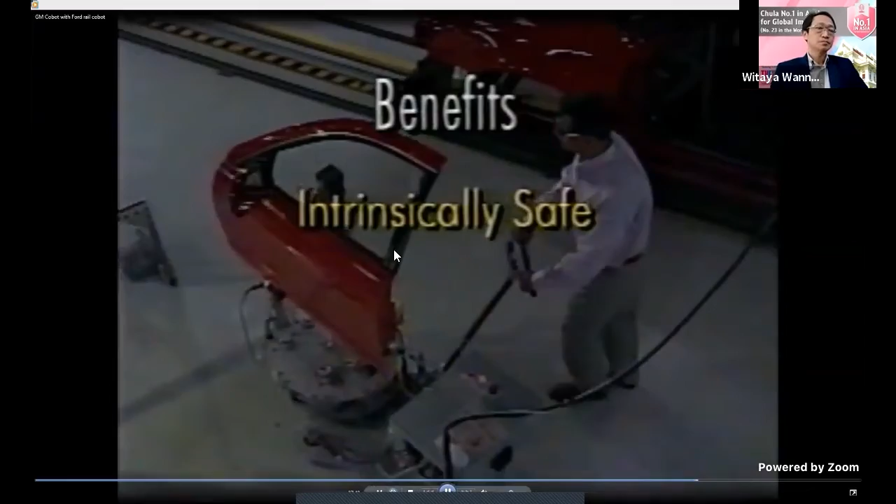There are no unsafe, powerful motors. Without these motors, the cobots themselves appear less bulky and unwieldy to the operator. Finally, as the system is software-driven, it is flexible and adaptive.

Research continues to develop the intelligent assist concept further. While GM won't be producing these intelligent assist devices, GM is working with suppliers to develop and produce intelligent assists that ensure operator safety while facilitating the performance of the operator's task.

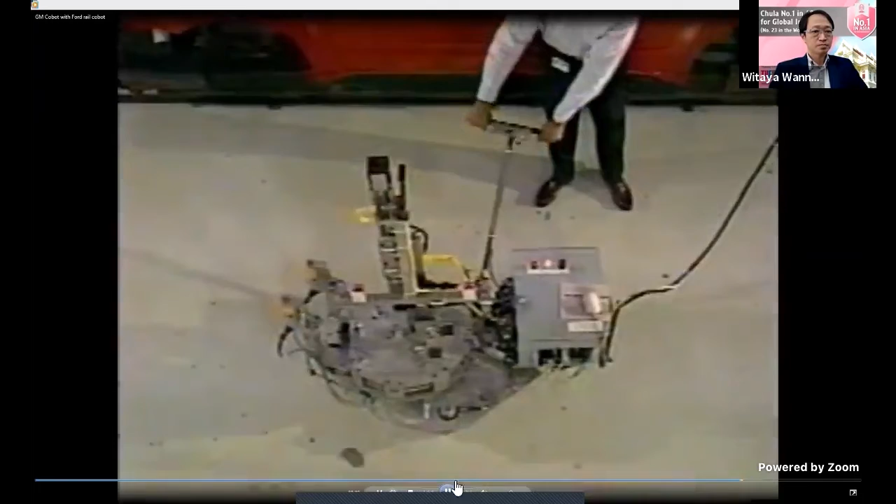This video will be shortly about overhead robots - this is the one that carries the bumper at Ford airborne, so that they can precisely locate the bumper on the jig, on the opposite side, and the human operator doesn't have to do anything.

So let me come back to my presentation.

Well, that's for the pure passive cobot. So I just showed you the path of how we could come up with the problems, the ideas, the development in laboratories, and deliver applications on the automotive industry like General Motors and Ford. We didn't only stop like that.

As a researcher, you might fulfill some complicated work, but we do something further. We investigate more, and we found once we get into real problems - I'm going to show you later what it is - now we're going to move toward another domain that we call the intelligent assist device.

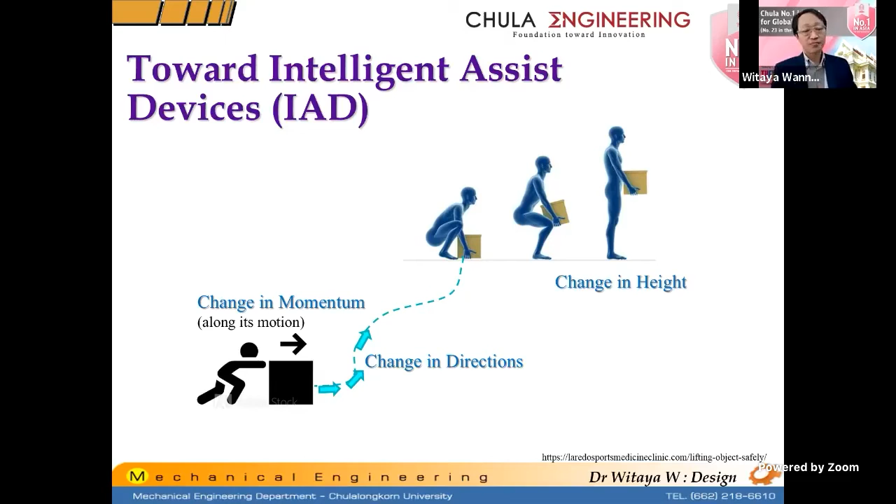Again, we start with a problem. I would like to share with you the case study of how we could develop the industrial intelligent assist device in the automotive industry. Start with the problem.

The same company - not only GM, but the whole automobile industry - this is what they found: 43% of the workers had some injury, and they found that the injury actually happened because of reaction and exertion. 62% of this illness was caused by repeated trauma disorder, and it caused a lot of problems because 32% of the worker's days away were actually a result of this kind of problem.

It costs a lot of money because the company needs to pay for welfare to treat them, and also find additional people to help solve this problem. They had to lose a lot of money, about almost 20 billion US dollars yearly, to compensate for this kind of problem.

So we were working on the industrial cobot, and we also worked on this problem at the same time. We also found that the problem occurs when a human operator assembles an object in a car. Basically, when a human operator carries a big object and manipulates a heavy and bulky object, because the human needs to provide high effort to carry and move it - think about ourselves.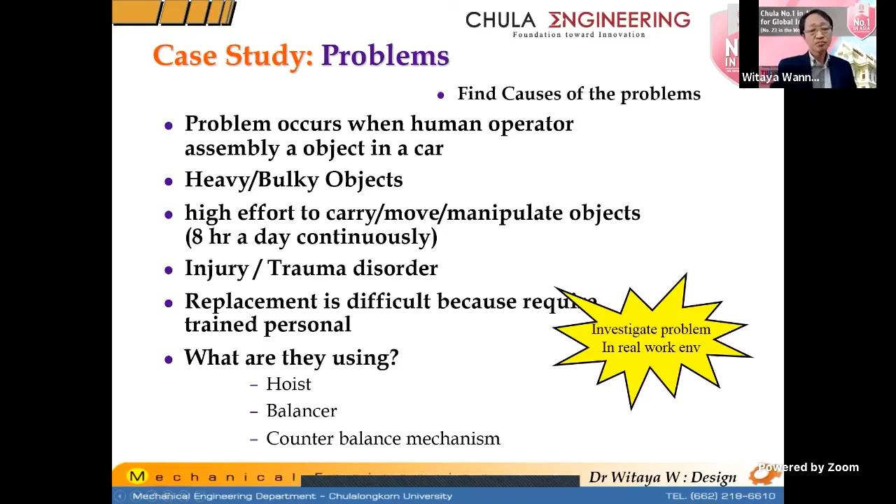We investigated what devices they were using at that moment. We found they're using electric hoists, balancers, and counterbalances, and they still have those kinds of problems. They use the electric hoist, which is basically too slow and very difficult to manipulate an object, because when you need to lift something up, you need one hand to grab the handle and push a button to move the object up or down. So you lose one hand already, and you only have one hand left to carry the object. That's not convenient and it's slow.

And we found the material handling industry uses a lot of this device called a pneumatic balancer. They use the application of pneumatics - high pressure converted to rotational motion to rotate the drum and move the object up and down. This is really fast, they love this device, and I also played with this thing a lot. It's fast, it's cheaper than electrics. However, you still need one hand to operate it.

Okay, the button up and down. You can even integrate the button to the device. You can do that. Okay, even though they still have some problems when you move things fast. It's pretty hard to control the pneumatic device to avoid overshoot or undershoot. So it all has some problems as well.

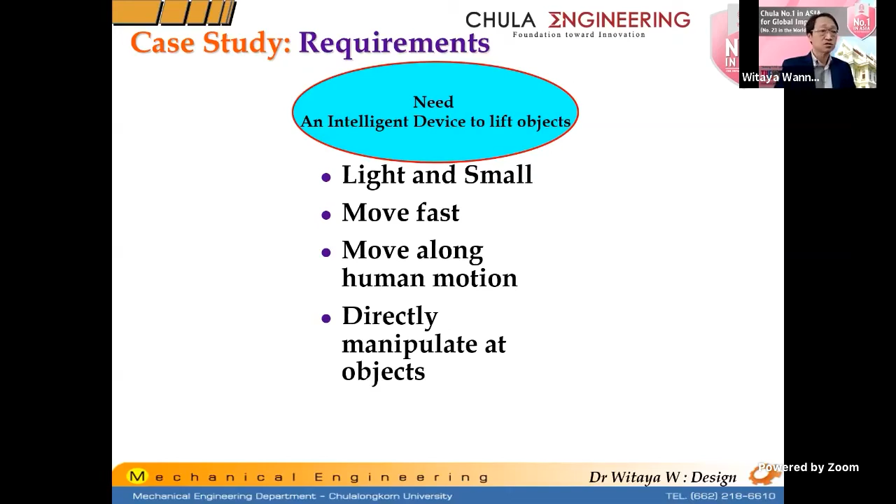And in fact, we prefer that humans should manipulate an object directly. How could we do that? With our technologies, since way back, what we did was develop a really simple robot we call intelligent lift. It's got a great response, matching human motion and intelligence, and it's programmable. It can move along with the human operator and has a programmable profile. It's basically a high performance electric hoist with programmable robotic technology enclosed in the system.

And we also developed a new handle, which we call the inline handle. Actually, this is not the up and down handle - we call it the intent handle, which reads human intention, what the human would like to do, and tries to act according to that intention. So we developed this new handle. It's a control device directly - it can match human motion and control the object directly.

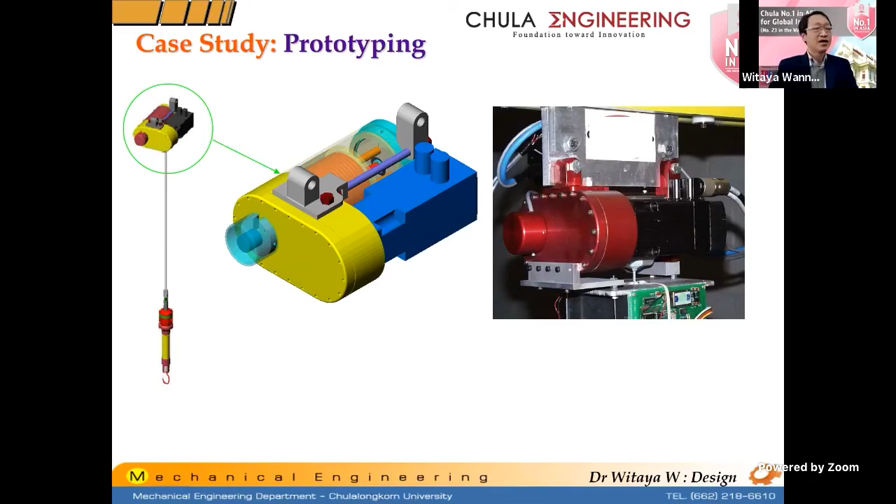With two hands, so this is the overall system. This is my design, made a long time ago, and we also built a prototype, including the handle prototype. We successfully built it, and this is what the overall thing looks like - just like something from a machine shop. We engineered it, putting in overtime to make things work, and it worked nicely, wonderfully. So I'll show you how it works.

We tested those things in our garage, in a small workshop. This is the device.

You can see how fast a human can move it. Right now the machine has a lighter load, a 60 pound load. With different ratings you can do the same thing. We already meet the requirements: light and small, can move really fast and really stable. The position control is really nice - it looks like we move the object effortlessly.

However, we still need a handle to put on - we would like to go beyond that. How could we directly manipulate an object? This video will answer that.

Hold on, I'm sorry, I made a little mistake. For some reason I don't have that video. Maybe I can show you from my screen then. I'm sorry, I don't know what's going on. Just a second. Let me share my other screen, just for this. Okay.

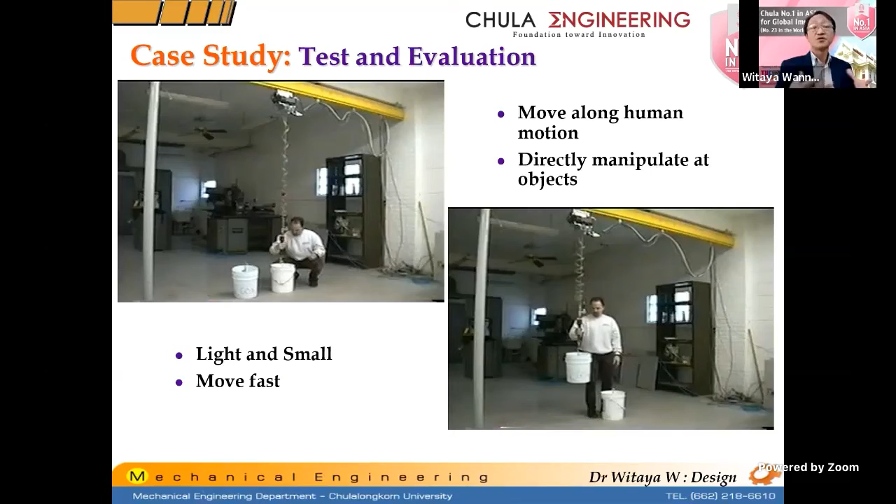So we did additional work - we also evaluated it by putting it on a real plant. We put our device side by side with the pneumatic balancer, and we also put it into real application testing. One test was assembling the propeller shaft on a GM truck, where they used our iLift device for testing, and another was moving Coca-Cola cans - big boxes that are pretty heavy - to help the human operator with material handling jobs. So we did a lot of plant and factory evaluation, and it turned out really nicely.

We patent our ideas. I am the main inventor of the intelligent lift. We patented it, and once everything is covered with patents, what next do we do as an engineer?

I would also like to recommend this to all of you. We're not experts at making things look nice, so I had to work with a design company to make this product look nice like this. We worked with a company in the Chicago area and asked them to redesign our product into a real commercial product. You can see they changed a lot of my design, adding nice covers and nice design details.

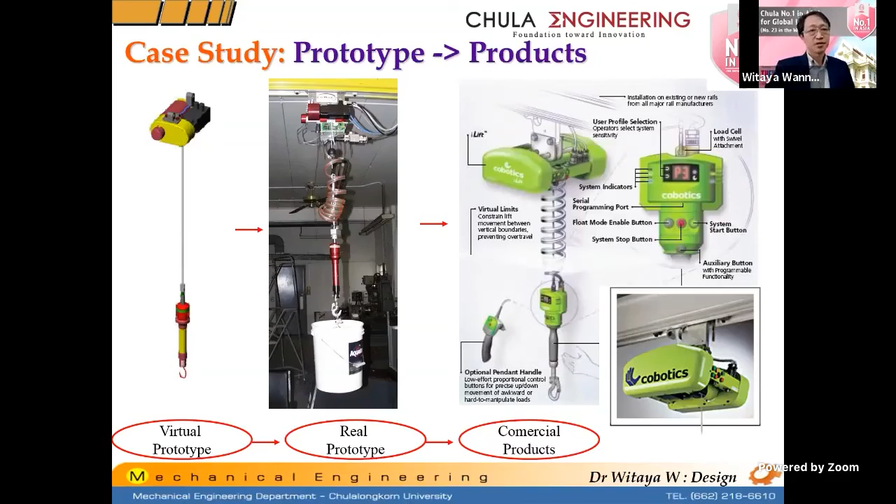The whole system is basically like this: you have the iLift that carries the object up and down, and we also have the system that assists humans to move around and increase their change in momentum. It's nice to have this kind of system. It can do a virtual surface, virtual limit, and we also developed a cable angle sensor that detects human motion and where they want to go.

Later our company was acquired by Stanley, and right now the product belongs to Stanley. You can search Stanley Cobotics on the internet and it will come up. Stanley actually sells the Cobotics iLift and iTrolley around the world.

These products have been sold and are used not only in the automotive industry, but in different kinds of material handling industries.

It's funny, I also found my work in the Korean language. My manual and everything has been translated for the Korean market, and this is also selling in the Korean market as well.

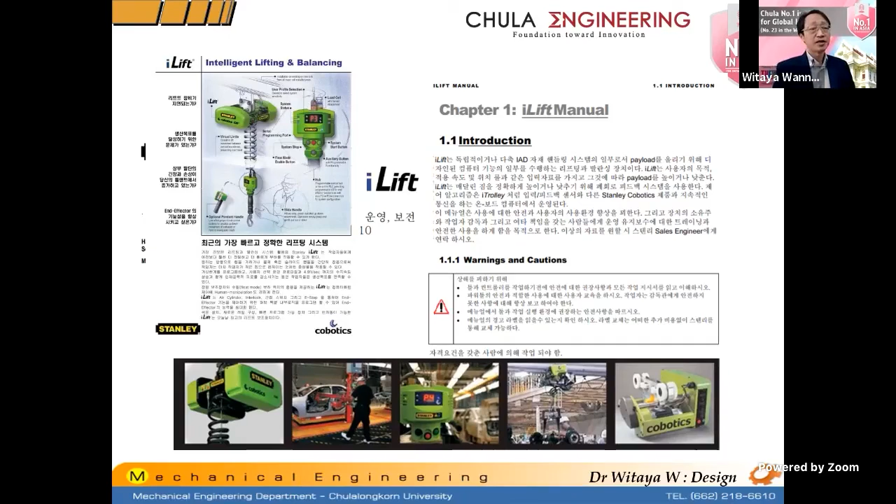So this is the story I'd like to share with you guys, how everything basically came up from the laboratory to application. I'd like to emphasize how we, as researchers and developers, could share a little bit about how we change from problems to products. I'll list some of the key things that I found.

I'd like to capture this, and hopefully this page contributes to some of you. When you think about it as a researcher, how could you go about doing the real thing for a real application? At first, most of the time, a researcher like you guys and myself would like to pursue our own dream - if we're good at robotics, we go for the robotics field, or whatever special topic we graduated in, we pursue that topic.

I would like you to think like this: do not start with those. If you would like to go for the application, you have to start with real demands - it's a must. At first, we got real demand from General Motors and Ford and the automotive industry. The whole industry needed this, so we started with those.

Second, most of the time we're going to find technology through literature review - we think about what technology is available that we can apply to these problems, what control algorithms we can use to solve this problem.

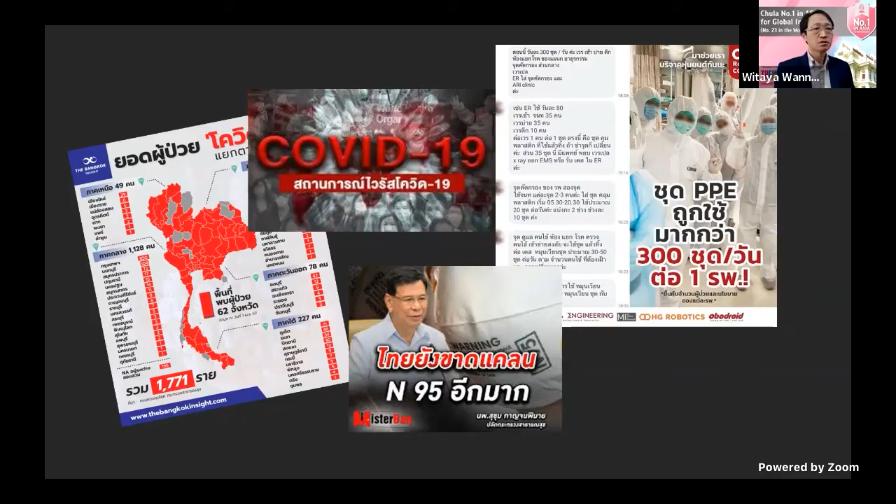Okay, like you guys know, in this situation we faced a lot of problems. PPE was very limited, and also a lot of countries did not send any medical device outside because they also wanted it. Around the world, they had their own problems. As Thailand, we don't produce our own robots, but we have a lot of robot researchers. How can we help? So we formed a team.

How could we deploy hundreds of robots to help hospitals in a really short time during the COVID situation? We're not talking about one or two robots, we're talking about hundreds of robots. How can we do it? So we used the same platform like I mentioned before. We had to find the factory requirements for what the hospital really needed. We did a quick prototype, deployed it, checked it, revised the prototype, and finally we were able to produce the robot and distribute it to hospitals around Thailand on time.

Okay, so this is a key thing. Most of the time, what we've done is provide what we think is best for the hospital and give it to them, right? But this time we did something different. We didn't do anything yet, but we sent our team. Our team went to the hospital, stayed with doctors, and saw how they treated or took care of COVID patients, and investigated it. We talked with doctors at several hospitals, went and saw for ourselves what they needed and what their requirements were, and we came up with two things.

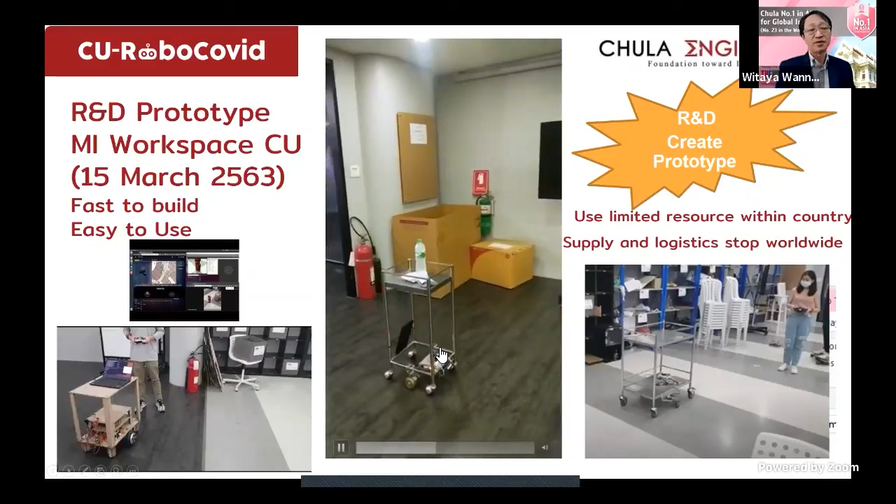So we came back to our facilities at Chulalongkorn University, and we noticed that in the hospitals there's limited space. They put the patients along, and we found that they already have some devices like this, including a food cart or medical cart system that they're already using.

So we thought about how we could modify this standard food cart to be a robotic device that can send medicine and food to a patient, and we mocked up this system within a day.

We created this in a day and sent the video to the doctor, and the doctor said, 'I want this kind of device, just go ahead and send it to try.' So we did it, we made this thing, and we went to the hospital.

At that time we went to Thammasat Chakri Naruebodindra Hospital, Chulalongkorn Hospital, Phramongkutklao Hospital, and Ramathibodi Hospital. We sent our robots there and tested them, even leaving our robot for 2 or 3 days before coming back.

On the 29th of March last year, we delivered our first prototype, bringing it to Ramathibodi Hospital for testing.

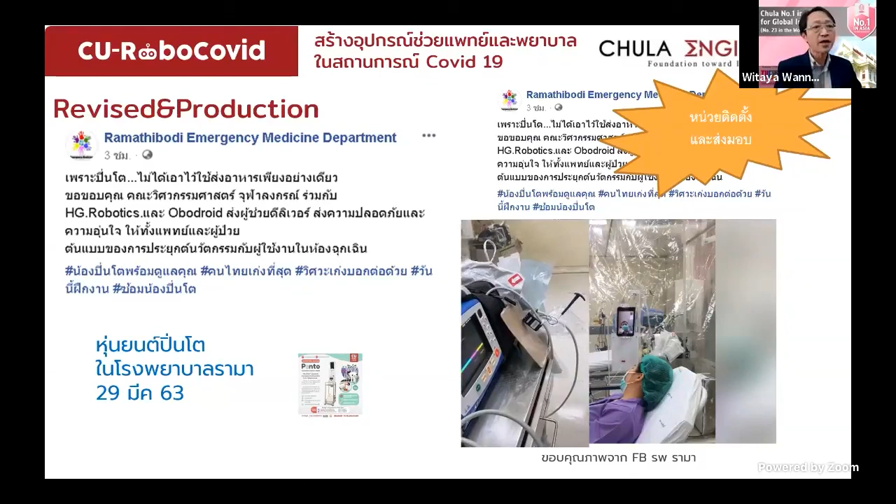But it turned out they asked us, 'Can I have the robot right now?' because they needed to open the COVID ward the next day. So it turned out we had to give our first prototype to that hospital in March.

I think that's pretty much it. We have a lot of video, and I probably won't be able to cover all of it in time.

We were also very fortunate that Princess Mahachakri donated a seeding fund to us to build this robot as well, and we sent a lot of robots outside.

I'd like to show you this. This is the video of us sending the robot to Bhumibol Hospital. When we gave it to them, they used it immediately.

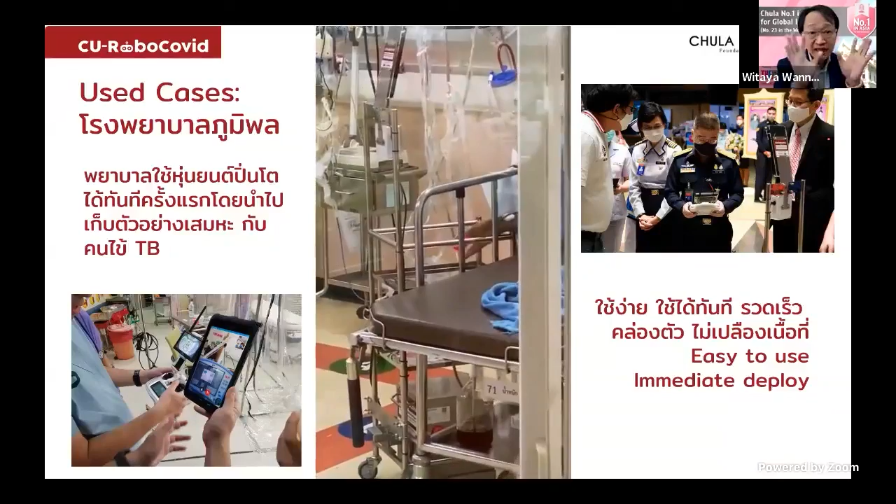They commanded the Pinto robot to go to a patient and gather samples without going inside. Of course, it's a very simple remote-controlled robot, but it's simple enough that an operator who had never used it before was able to operate it only 5 minutes after grabbing the controls.

It was the first time they grabbed the robot, and we used this similar device for a lot of things. It really works nicely - this is at another hospital.

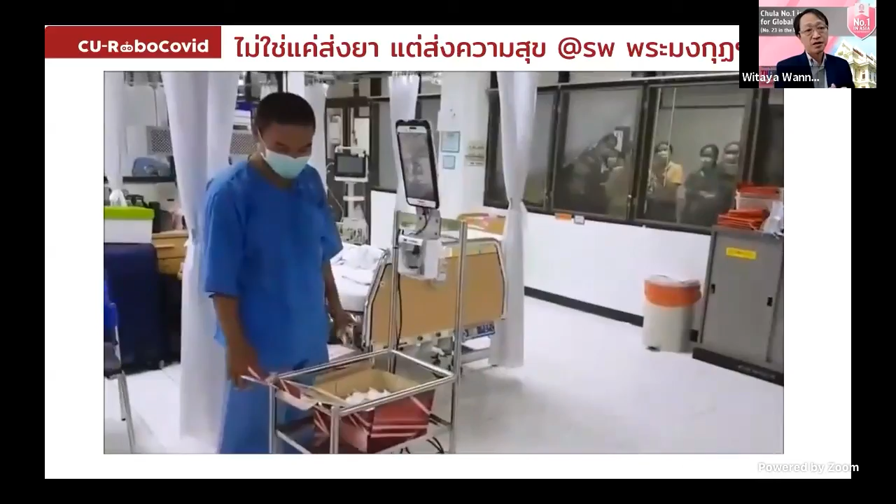It's not only about the robot, it goes a lot beyond that. What you see there - a nurse noticed that this COVID patient had a birthday, so they gave a birthday present and sang a birthday song to the COVID patient inside the ward, since they couldn't go inside.

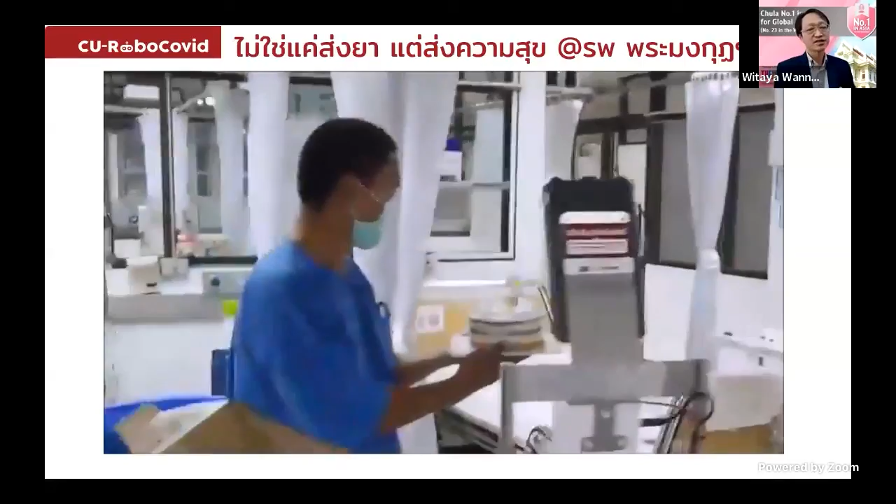So there are a lot of good devices, but you have to find the right way to solve the problem - then you can do it. Let me share with you how we solved these problems, on time, through video.

I think I'll conclude my talk right here. I know I probably took a whole hour, and I wanted to share with you how we went from research in the laboratory to application, and from problem to products. Thank you.